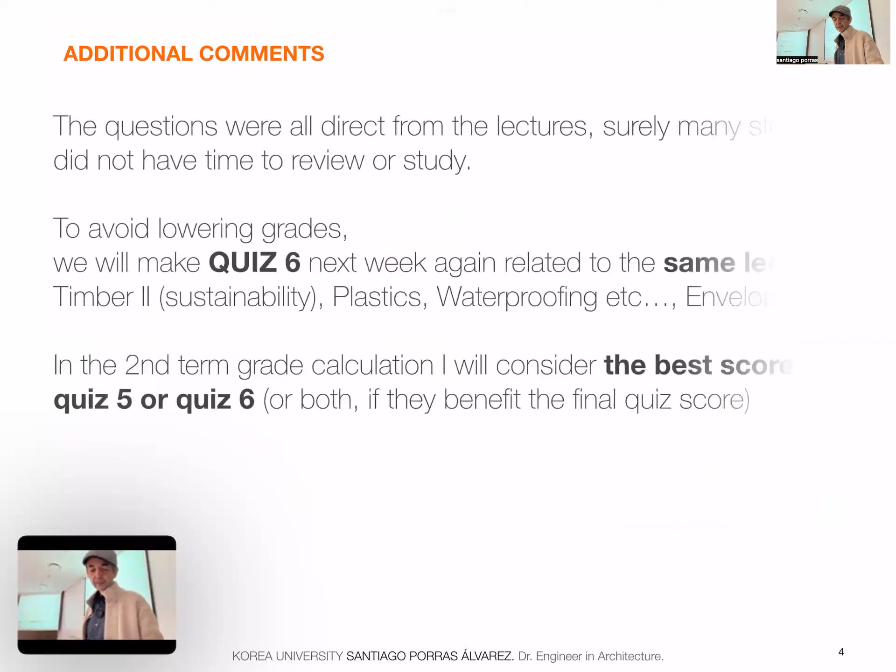So next week, next Tuesday, we'll have quiz 6, which will be the same contents, right? Sustainability in timber, plastics, waterproofing, fireproofing, and so on, and the introduction to envelope.

And my idea is to take the best score of quiz 5 or 6. So you have an opportunity to get better.

Unless that may complicate, maybe both the scores, because if you do very well on both, they might benefit your final score. So just to benefit those who studied a bit more, right?

So please find some time. The semester is almost over. It's not almost over. We have still 6 weeks, including this. So there's a considerable part of the semester. And in general, the group is doing very well. So do not get tired too soon.

Activities, as I said, the online lectures were not so successful, so there's not many comments. Of course, they didn't have activities, but still, there is something interesting.

We had in the introduction to the envelope some comment about thermal mass, and I commented that Hanok has this kind of unique feature of having tectonics, but also having thermal mass. And quite a few people said thermal mass is not necessary in Hanok.

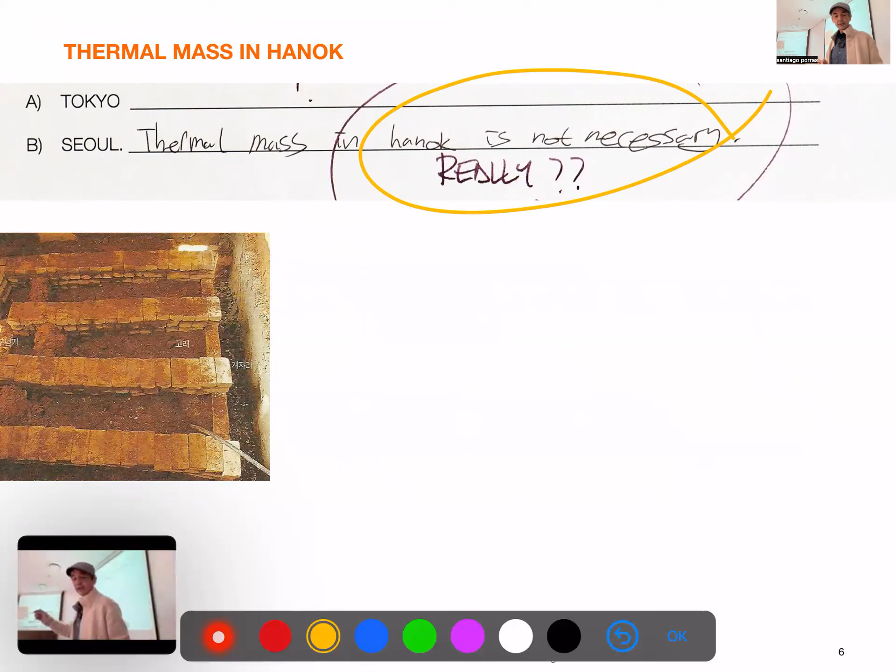This is the Ondol base, which is a series of ducts, right? Going to the chimney at some point, over which the floor is built. And those brick or stone walls accumulate a huge amount of heat, right?

And that's thermal mass, right? That's part of the Ondol part.

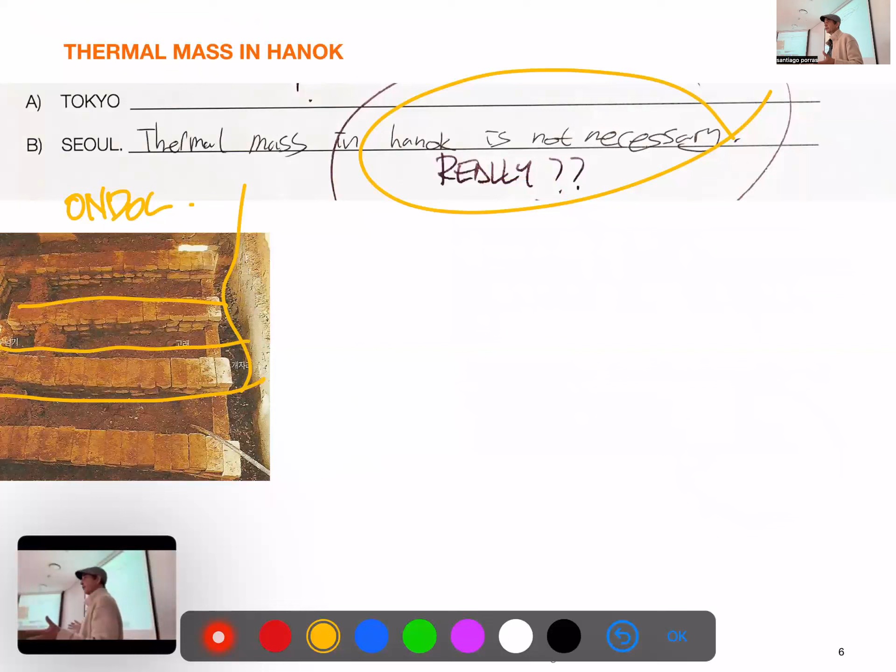So the Ondol, traditional Ondol is a heat accumulation system. Then the roof in Hanok, in temples, traditional Korean roof is really heavy, right?

It has a big layer of mud, right, of clay, not only for the shape, but obviously given that mass that will benefit in this very extreme climate.

And of course, in southern facades and sometimes in others, we have this kind of light enclosure you can totally open, but there is always kind of massive walls, at least in the borders, right?

So yeah, I'm not sure about this. Of course, you can build Hanok very light, but that is not Hanok anymore.

It is Japanese construction. We commented on Park Kil-ryong, architect, last week. He has a lot of interesting articles you can access. This is very lucky. And he studied in, well, what we call now Seoul University, right?

It was like Kyungsong Daehakyo, Kyungsong, whatever. And he wrote that he was mad at Japanese architecture. It's just a paper, it has no mass. How can that be a house, right? It's like it's against the genetics of the Korean feeling of architecture.

So I think, yeah, we should be a bit more open and really see the reality of things.

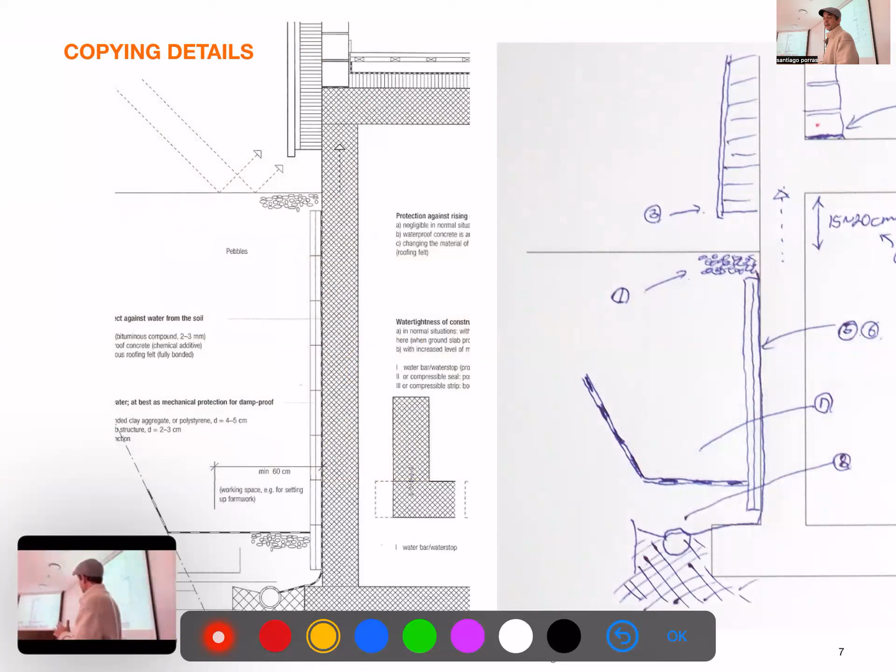Other things about this simple detail, we copied in class, and you did well. We have very short time. I gave just the outline to make things easier. So there's one part that many people did wrong, right?

If you see, we have just the concrete wall with this waterproofing, right, before the masonry, and many people put it in the wrong place, letting some kind of weird, different kind of structure. And it is surprising because you only need to look.

Remember that this course has, for some reason, the SPC for graphic expression and for visual expression. So drawing is not just doing something nice on paper, it's about looking, understanding, and applying the reality, not something which is wrong. We have a tendency to look and to draw from reality.

Even copying things, which is easier, takes some kind of concentration. You need to make a memory effort, look and check what you do. And since this is hard, we naturally rely on our memory, right? And we do what we know, and then we do not do things well. So there were more things, but I think it was so general, I was a bit surprised. So please be careful when you copy, at least copy right.

And of course, we didn't have much time, but only putting the numbers is not enough. You have to put the keywords and know what is what, right? You don't need to put a full paragraph, but you may have noticed one of the most common notes I put in your assignments is draw more, write less, right? But still you have to write something. We need to complement with at least some basic keywords and things like that.

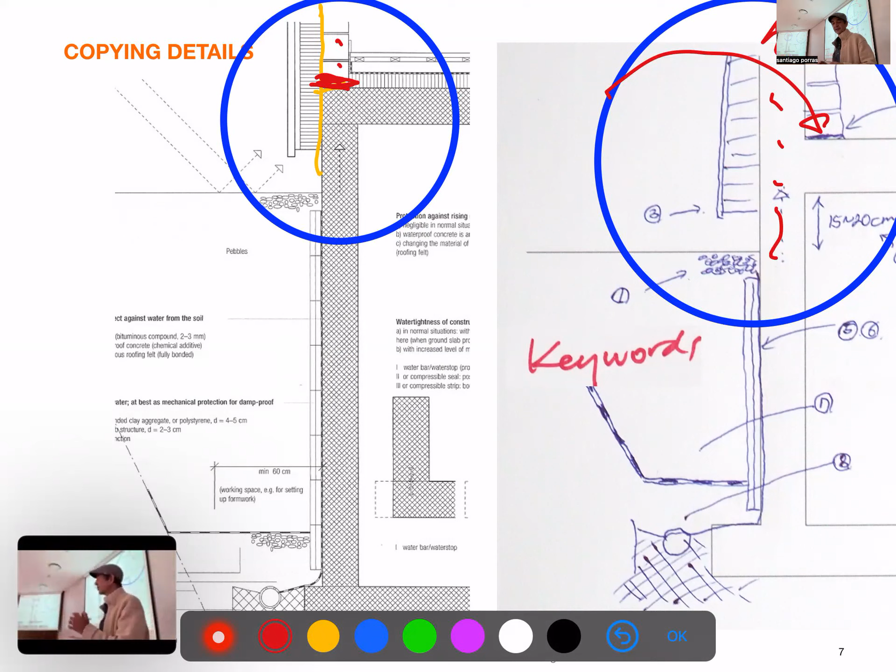So about questions and answers, we have very few. I probably will upload questions and answers from plastics from previous years, so you may want to look at it. But for instance, here's some questions. One was about this, I think you can see it, this kind of texture in the exposed concrete walls in which you have this kind of funny circular openings.

This is due to the way of construction. When you have the forms, which is usually some kind of a wooden board, there's many versions of that. In a tall wall, when you pour the concrete, there's a lot of pressure, right? So supporting that's difficult. And one way of doing it is with a steel cable with some tensors, right? To do that, you need to make a small pipe. And that's enough without needing a huge scaffolding outside. Then when it is finished, you just fill the holes with a non-retraction mortar.

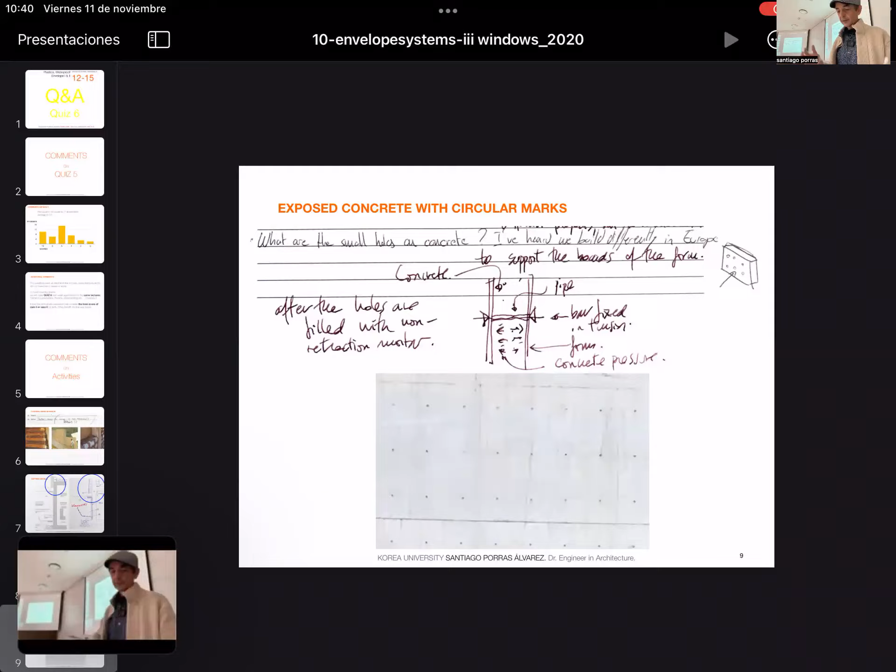So that's the why of that texture.

So there was a couple of questions about cracks in concrete. We spoke about this kind of put-in joints in buildings. There's no way, or a very difficult way, to make a totally continuous concrete without any kind of joint. And that was in the context of the Herzog & de Meuron building, right?

Then there was a question about the possibility of grooves in facades, right, in walls. And of course, I will explain a bit more of this. And of course, you can make grooves in walls, right? Only the engineers have to decide how much, how deep, how it will affect the structure. But of course, we do it all the time.

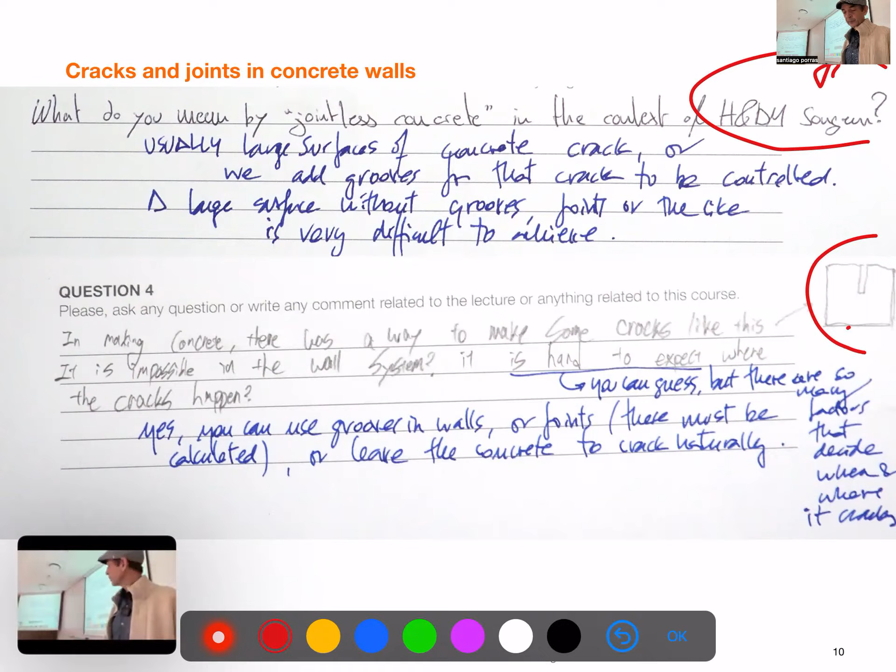Sometimes additional very small mesh of steel near the border, which is so difficult because pouring concrete is very aggressive. So if it touches the form, it will deform. So I'm not sure what they did here, right? I don't have the details. But if we go to the interiors, right?

This is an IKEA store, which is not square meters, but hectares of concrete floors. They are very nicely done, but you see they have joints, the typical joints, but you can see those small bits of steel, right, which are mixed in the mass, and that prevents the cracks quite nicely, right? I think it's the only time I saw this. I studied it in school, never did it, and that's the first time I saw it.

But even there, you see that eventually you have cracks, right? It was perfect for a few years, and I was amazed. But this building may be already 15, 20 years old, and it cracks. So that's the thing with concrete.

Well, there were questions. So how thick can a wall be? Well, as thick as you want. You are the architect, you are the boss, you design it, right? We saw that in a brick building, the Monadnock Building, we had almost 2 meter thick walls of brick, right? The problem with the thickness is that you lose space, and space is expensive, right?

And nowadays we can make light construction. The comment on thickness is that we need a huge amount of insulation to have those zero energy buildings, right? And that's something which we didn't solve perfectly yet. And of course, if it is a massive construction, the weight has a lot of influence. This is why skyscrapers need to do things as light, as thin as possible.

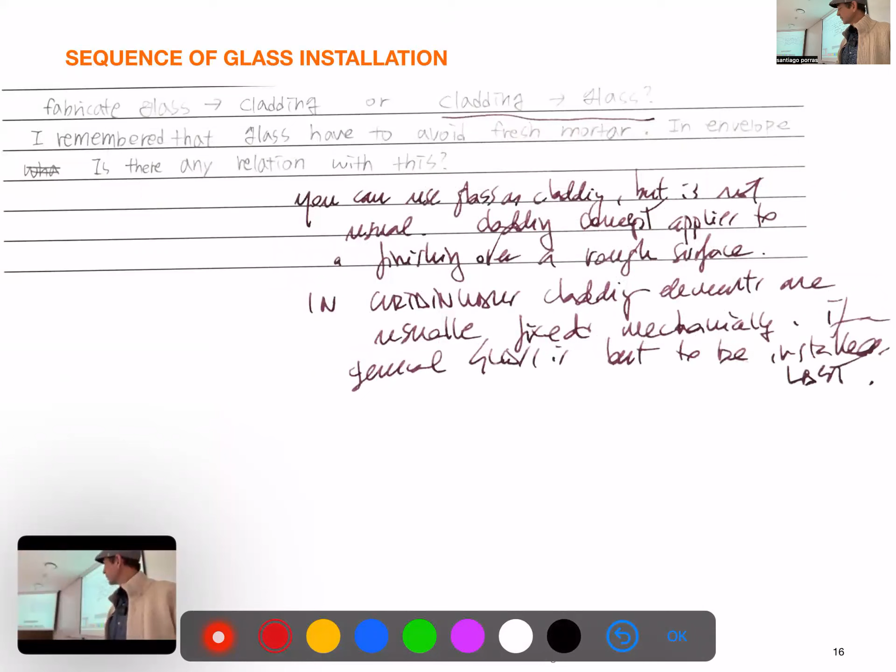And I think it's about the process of cladding, right? You have glass and cladding. If you are using mortar to fix the cladding, better to put the glass at the end because the mortar can damage the glass. If you are fixing mechanically, that's okay. You can do everything at the same time. And that said, we're going to the windows.

So I was debating doing windows and curtain walls together, but I separated them because we had these initial explanations, which took some time. And I reviewed the time we have left, which is not much, which means we have to concentrate and be careful, but it's also good because the end is getting nearer.

So nice to see you. Good morning.

So we will have windows today. On Tuesday, we'll have curtain walls. With that quiz, please study. Of course, the questions will be different, I think, right?

And then we'll have like 2 sessions just with case studies of envelope, windows, curtain walls. Here I gave some case studies at the end, which I will not explain. We'll do them in the previous session. And then we'll go into flat roofs, sloped roofs, and 1 session of detailing. And then we'll just have the time to finish the rest of the lectures.

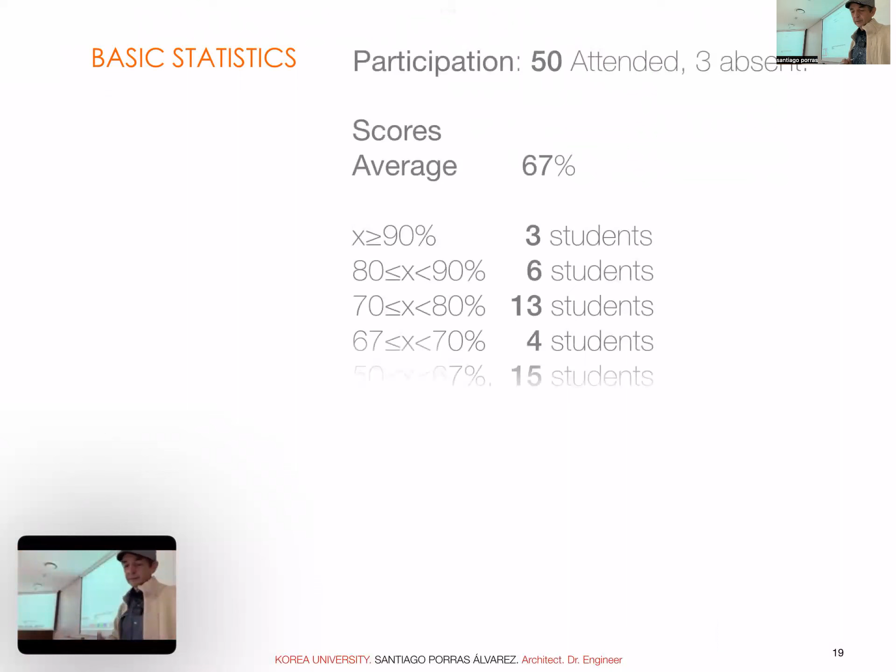Okay, we have some comments. Midterm exam, I didn't forget. Midterm exam, we had 50 people, 3 were absent. So the 3 students, I assume they already gave up. It's a pity. Because, okay, sometimes you are overwhelmed with courses and so on, but this is one annoying course. So if you can pass it, you have it done as soon as possible.

The average was 67% of the score, which is rather low, right? Still, 3 students have over 90%, right? Best 4 were 2 boys and 2 girls, so that means some balance, right? Congratulations to those who had over 90 anyhow. Majority was actually over the average, right? So that would be the average in terms of like a B plus or over, right? And we had 9 students on the fail level, which doesn't mean you fail the semester. That means that your knowledge is very poor and you should study more if you want to have at least the basics.

Because of that, as I said in the post I put in Blackboard, I raised it a little bit. So the highest was 93, so I put it at 100, right? And I did the proportion to everybody. So in that case, only 3 students were in the F. And still they have the possibility of passing the course.

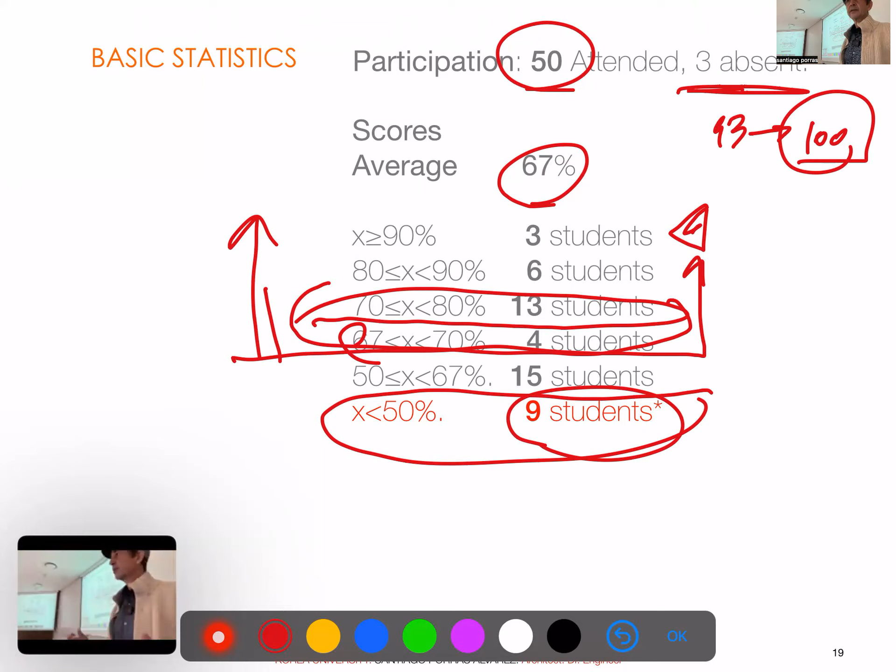So 11 questions out of 60 were failed by more than half the class. So they qualify as slightly hard and difficult. But I was surprised by the questions which were most difficult. And by far the most failed, that means only 20% got it right. That means a few people knew, and maybe a few of them got it right by chance, because you have 20% chance to guess it, right? Just this one, which is just an elaboration of the concept of cold stretching, right? Usually about half the class has it wrong, but 80%, I think, is the first time. And the question was not so difficult. We had explanations, we had questions and answers.

The second and seventh, so it's a question with 2 points, were actually planned as difficult questions, the ones in which we have this kind of log, and we had 2 questions about them: which kind of timber it is and where we'll use it. So the point is, this is the same log in 2 different positions, right? And we said it has a very dark part and is more expanded. So that is typical of a softwood, right? This is what we call reaction wood, right?

There's many ways to this. It could have been the same quality of timber. If it's the same quality of timber, it will be the difference between belly and backwood we saw in class of the trees, and then the reaction will be different. This area is reaction wood of softwoods, which is very strong in compression. Then we have the decision of what to do in this graph.

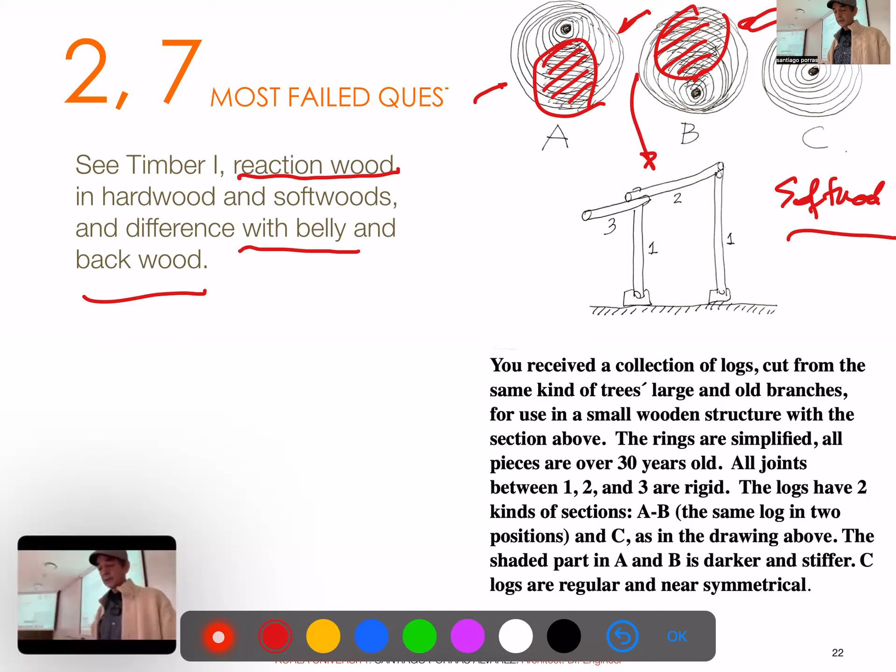So in a beam, we have the compression on the top. In a cantilever, we have the compression on the bottom. And then in columns, we'll have mostly the balanced element. This is kind of a just academic question.

I know that in general, people try to avoid reaction wood, but I have seen this used. So there's a possibility. Some students said C everywhere. That was not the intention of the exam, but actually that's a reasonable thing to do, so I gave that also correct. Those who said C everywhere is correct, but the idea was to make you think about the different positions of timber, how it affects, and the kind of wood we are using.

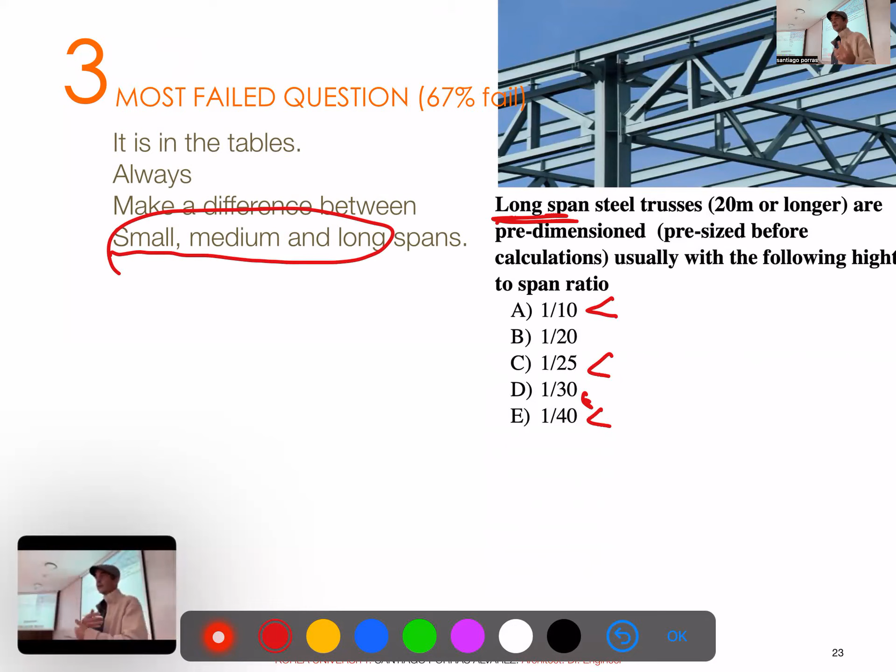I think it's the first time so many fail in this kind of question. So, yes, please remember that this is just for having a basic proportion in design work. You have to calculate, of course, and things can change a lot. But it is embarrassing — you make still projects with a section of floors which are like 5 centimeters thick, right? Which cannot hold at all.

So please go back to the lecture. It was explained, it was repeated with examples. This is again one interestingly failed by many people. This was one of the easy questions. And of course, glass we can recycle perfectly. It's very simple material, it's very easy to recycle it. You can mix with other materials and do new glass. There's not any limitation in glass recycling.

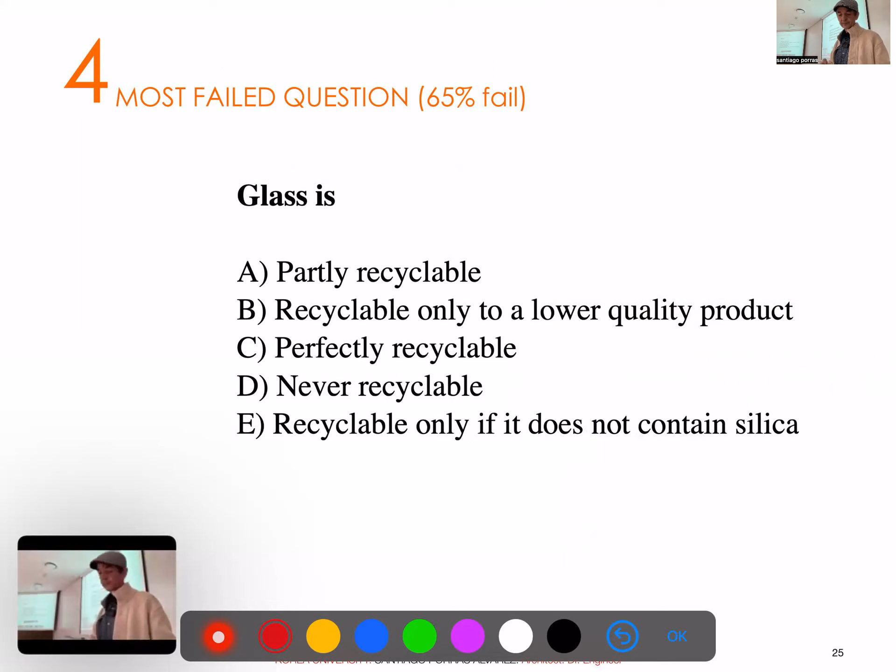In the same point was timber. By the way, I realized I didn't share the photos of the workshop and nobody asked for it. That would have helped, right? The fail here was about not the cuts.

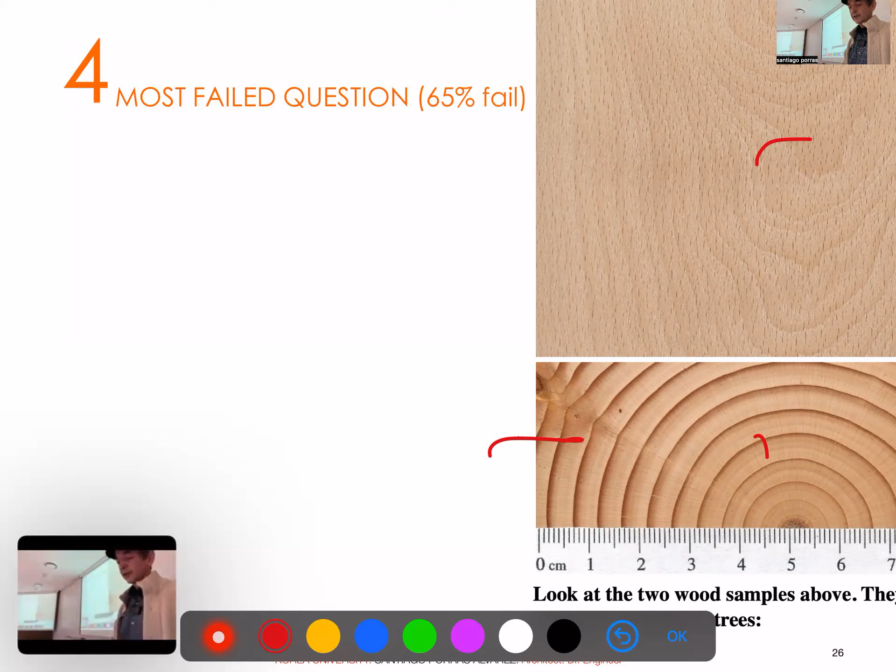Most people understood tangential and transversal or horizontal, this was very clear, so that was not difficult. It was the hardwood and the softwood. We gave the hints, and actually the top is clearly the same imitation you have in the desk, and it's a complex texture which applies to hardwood. And the photo on the bottom was also in the lecture, it was one of the samples we had of the pine trees, I think, with the conifers.

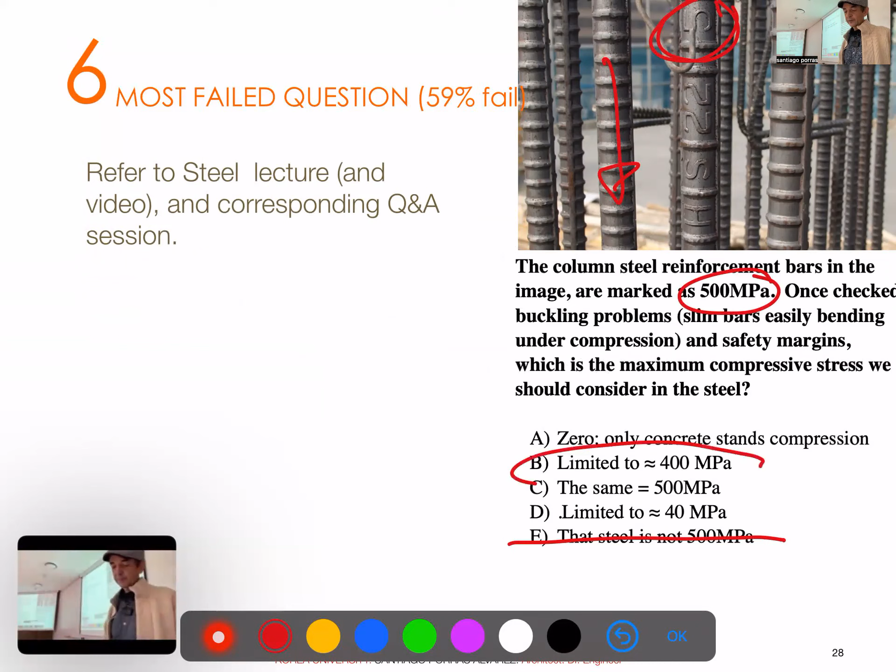This was interesting also. Again, this is something we explain often. So the steel in compression reverse. We did in class, we commented in the activities, we had something, so I will not repeat, it was explained. And you have here the 5, so the steel is actually 500 megapascal. But the point was the limitation to 400 in compression, and we said why.

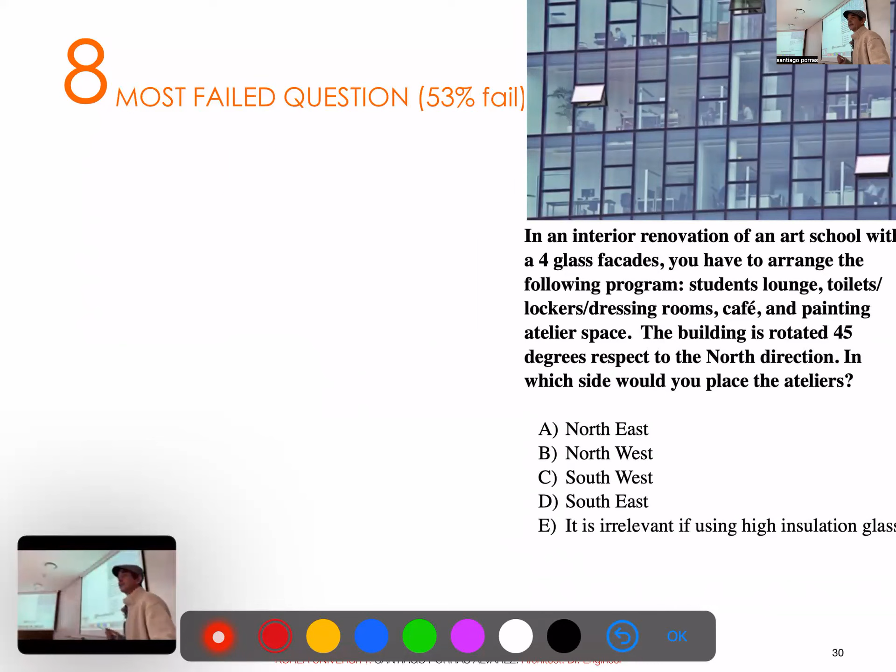And finally, the question 7 we saw before with the timber—I just gave up about north, south, east, west. Still, many people replied that the best glass wall for a workshop is southwest, which I do not wish you to have as your office in the future. About 10 to 15 of the questions were extremely easy and were done right by over 80% of the class, so the exam was okay.

If you have more questions, you can always ask. We don't have much time left, so we're going to move on to Windows.

Windows are an important part of the project, and many good architects have memorable windows. This is one of my favorites—Voysey, an Arts and Crafts British architect who made fantastic houses. Those bow windows on one of his most famous houses are really gorgeous. There's a tendency of making windows like the typical Annam-Dong villa 1 by 1 meter sliding window, which is okay, but windows are really one of the most interesting parts of design, creating not only the image of the building but also good interior spaces.

So this is the plan for today and Tuesday. Let's go straight to the first part, Windows. This example is a house in Karuizawa by Hisao Kohyama. Kohyama is from the school of Louis Kahn, apart from being my professor, and his windows show this obsession that Louis Kahn and everybody behind him had with making a full world out of the windows. You have shades, a totally closed window, a small part used as a beer stand, small openings for ventilation—you can even open the floor to clean and put the dirt on the ground. So there's a lot happening in just a small opening of a window.

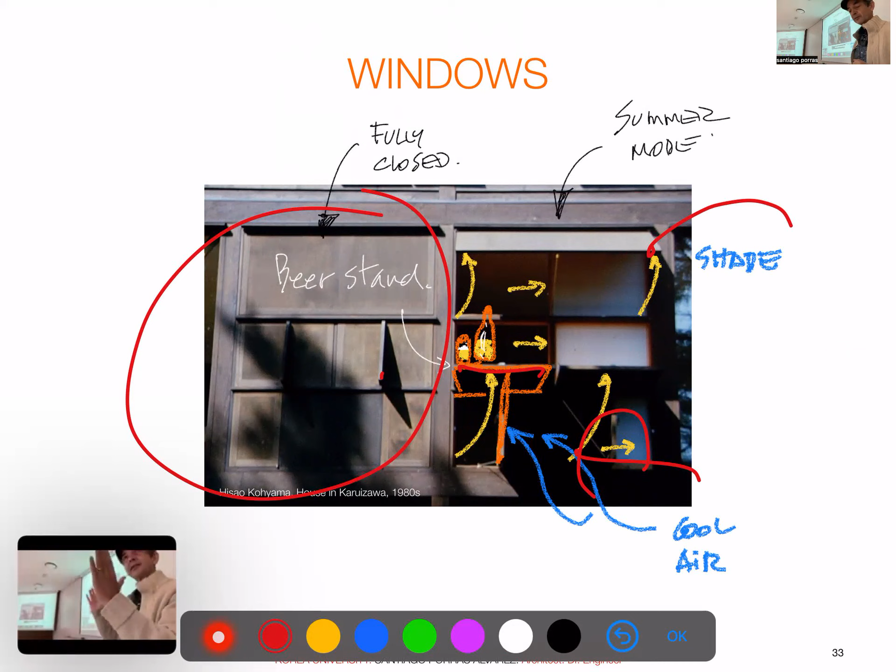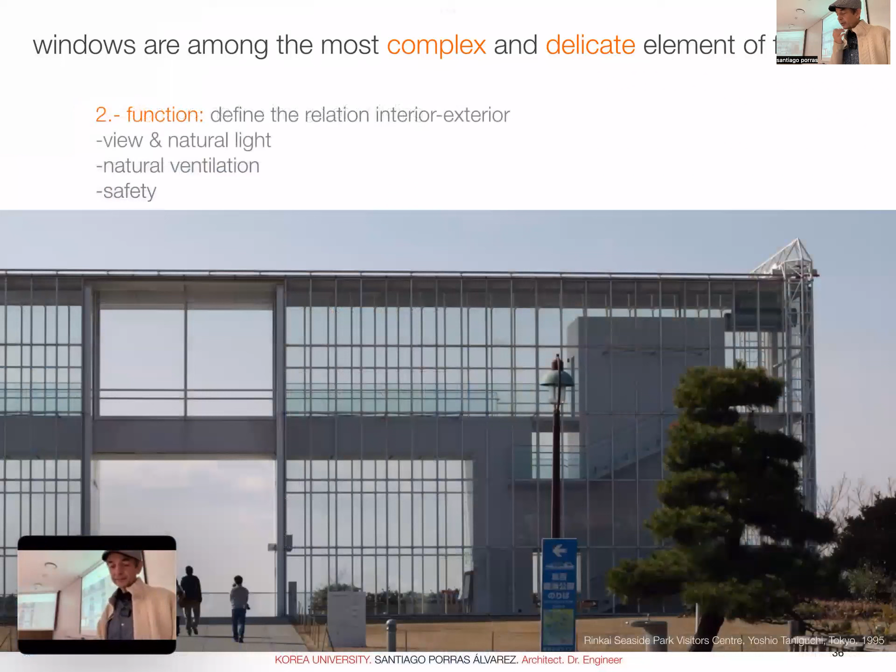Again, this is another of my favorite buildings—this is by Yoshio Taniguchi in Tokyo, a visitor center. It's a little bit out of the center, but it's really fantastic—a glass-only box, elegant and very well detailed.

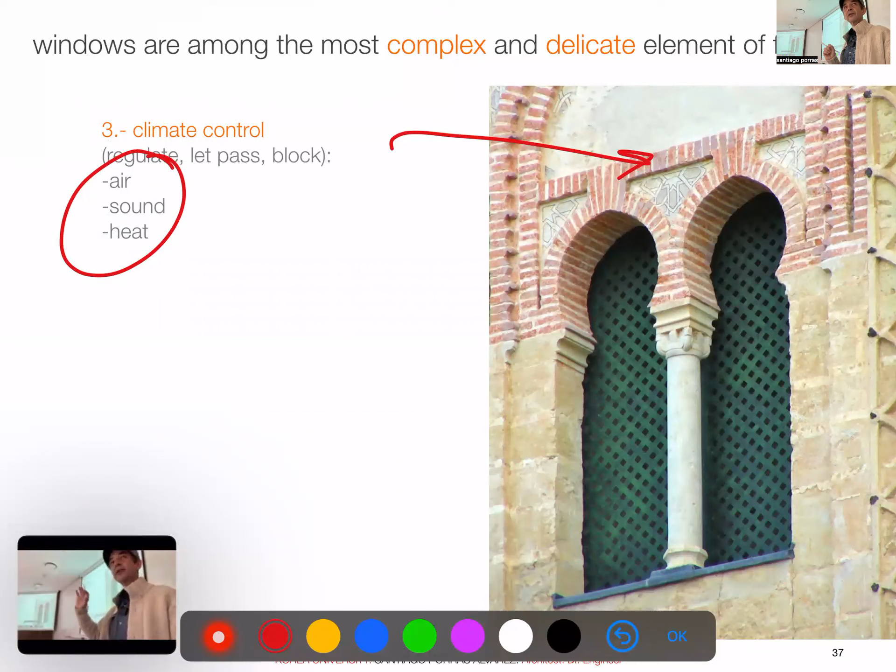Then, of course, we have climate control, especially air, sound, and heat. This is a window, I think in southwest Spain, in which the view is not important—it's just diffuse light and air going through. So sometimes glass is not the essential part.

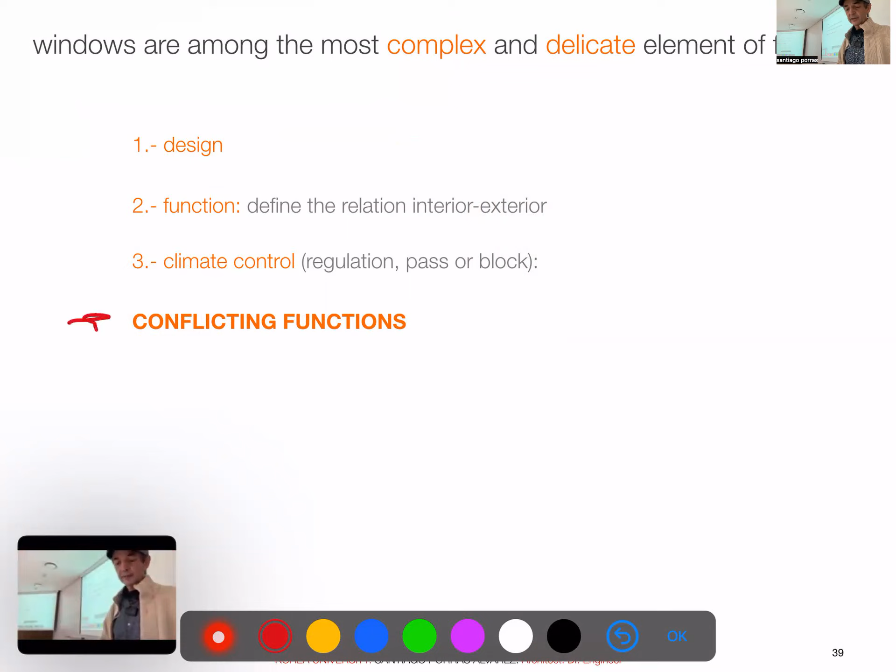But there is one thing to consider: some of those functions enter into conflict, and that's a problem when you have to comply with codes and still want to make good architecture. For example, we need clean air to breathe—that's a biological need—but letting windows bring air inside makes us lose energy. And if we let air in, noise also comes in. So that point is very difficult to solve properly. This is the summary of those three basic functions, and the difficulty of windows is that they are conflicting.

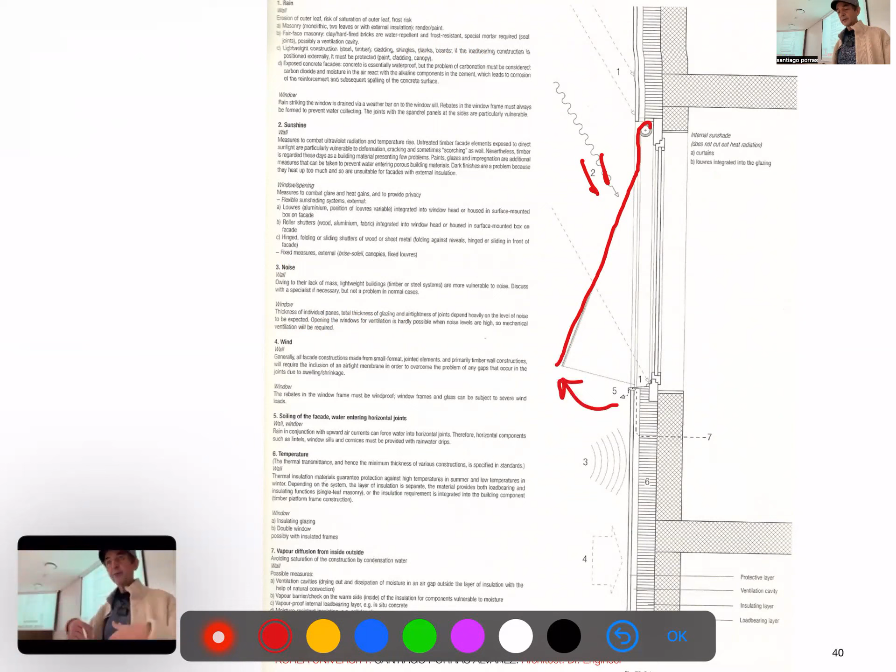So let's go back to the book—I think you have this in good quality in the final handout. It's a nice summary of everything we can do with a window. Very clever: shading outside is the only way to really block heat from the exterior, and in this case it would be rollable, so it can even be movable. Then, of course, you have the glass, and you may have an inner shade—so we get three layers, and the text elaborates on those basic functions we discussed. You'll notice we have very difficult joints where water can come in, and thermal bridges, which is what we'll try to look at a bit in the following parts.

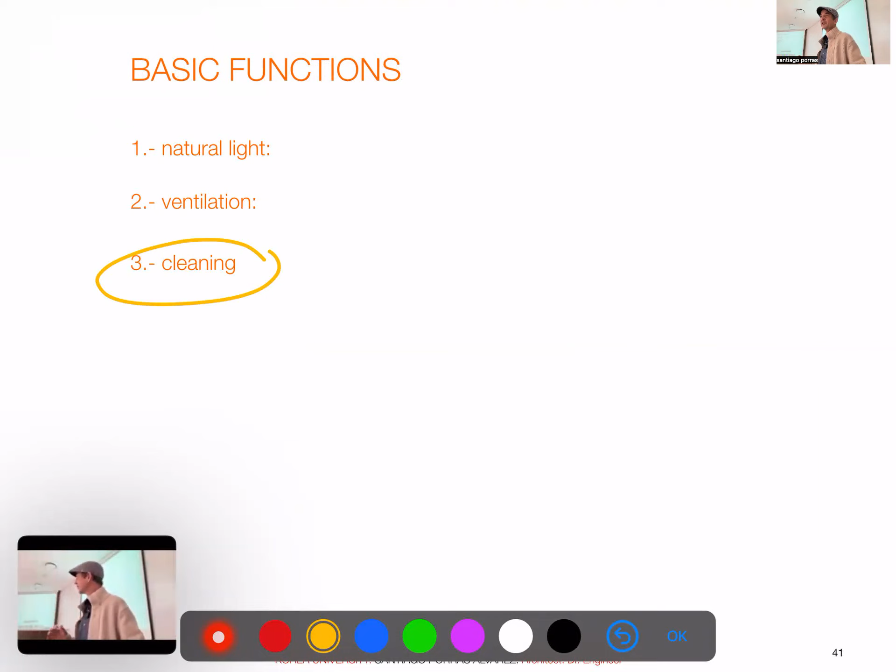So let's go about the functions. And I put cleaning because surprisingly, Korea is a country where cleaning windows is not a habit, but almost everywhere else in the world we have to have our glass clean, and that has some kind of safety issues. So I will just make a small annotation on that.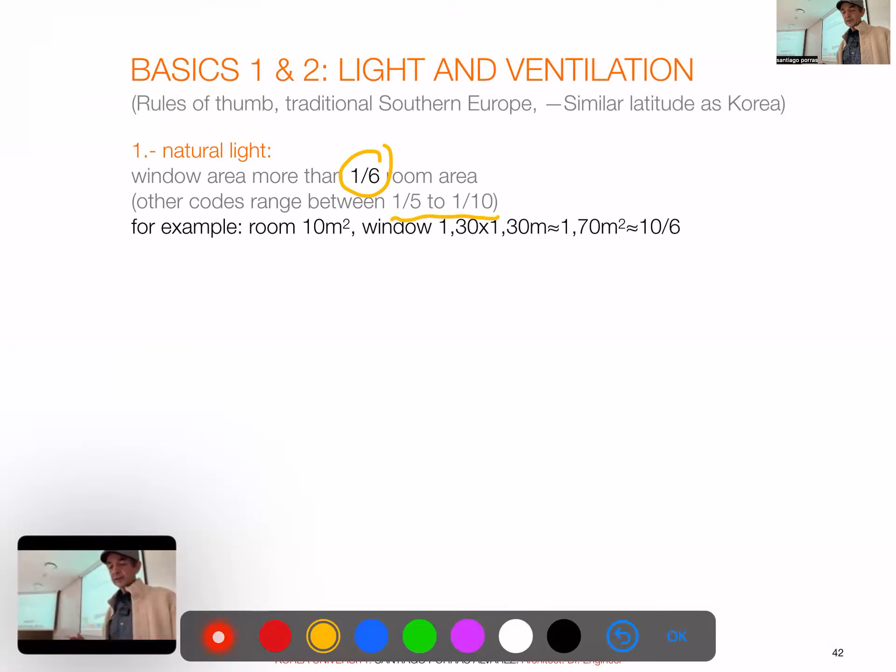For natural light, I will add some rules of thumb, things the old guys taught, or what I learned in school in the 1980s, about how we could dimension the windows. Usually we made a ratio between the area of the room and the area of the window. There's not much science, just practical experience. Usually we try to have at least 1/6 of the room area. Other codes give you more or less. So if you have a 10 square meter room, a typical bedroom for 2 people, we can have a 1.3 by 1.3 window, which surprisingly is very close to the standard window you see everywhere. 1.2, 1.3 — probably that comes from habit.

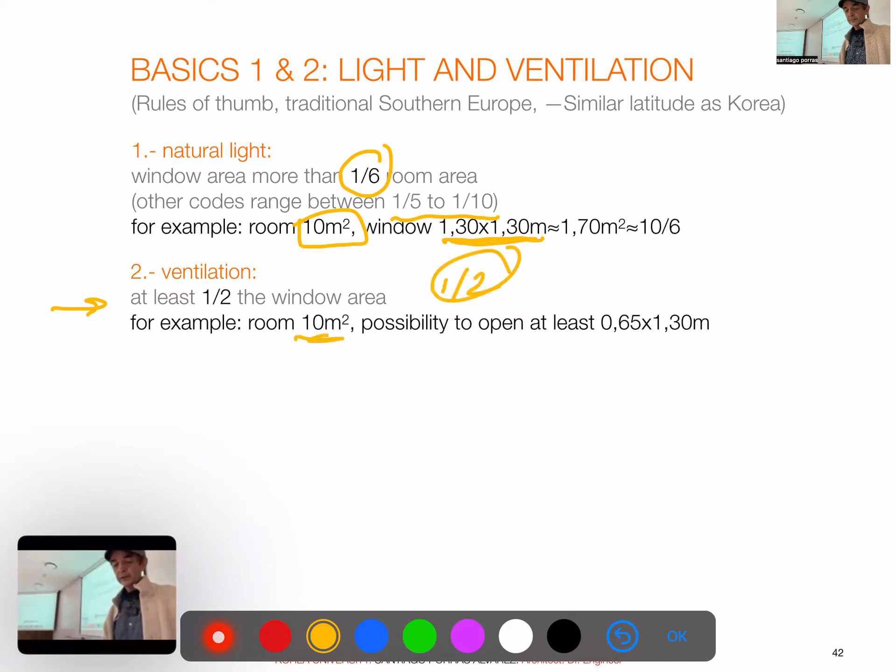For ventilation, again, this is for mild climates — it's about half the window. So in a room of 10 square meters, it would be half of that. This natural ventilation is something that these tiny openings in curtain walls do not achieve, because the ventilation area is very small, and that doesn't help cooling or renewing the air as we need. Again, this is a traditional thing.

Natural light, yeah, we usually say daylight. We don't call it sunlight in general. Sunlight is like straight sun hitting somewhere. So daylight can also be diffuse, indirect light, or reflected light.

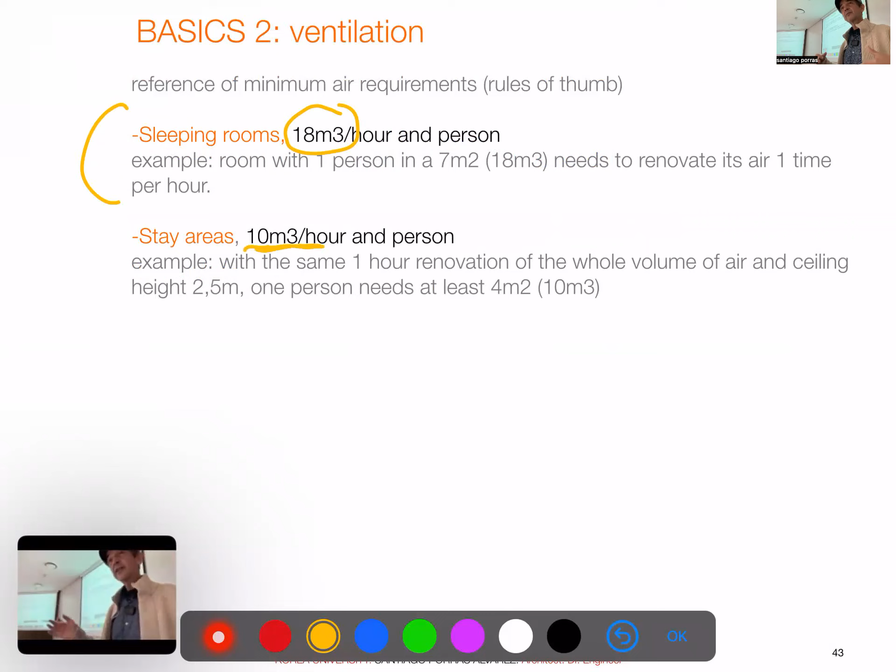In general, in terms of volume, in bedrooms we calculate 18 cubic meters per hour per person. In areas of stay, a bit less. When we sleep, we really consume a lot of oxygen. If we have a typical 2.5 meter high room, that means 7 square meters per person, and in living rooms, like 4 square meters per person — which again, if you see the standards for minimum space of rooms, they are defined like this. A single bedroom, 7 square meters, is quite standard. Double bedroom, 10 square meters. Living rooms for 4 people, 16 square meters.

Many of the basics we have as habits, developed in the 1950s, 60s, 70s, come from these calculations.

But the problem is how to put the air inside. Of course, opening the windows is the easiest, but we lose a lot of energy. So the most basic method is by infiltration — sashes are not perfect, you have slits, and the pressure of air just pushes inside. In a typical building, the air may go through the slits of the doors. And this kind of air movement — if you have both facades, there's pressure and depression, and that helps the air move. If you have a stack effect, that helps even more. This is a very typical design choice.

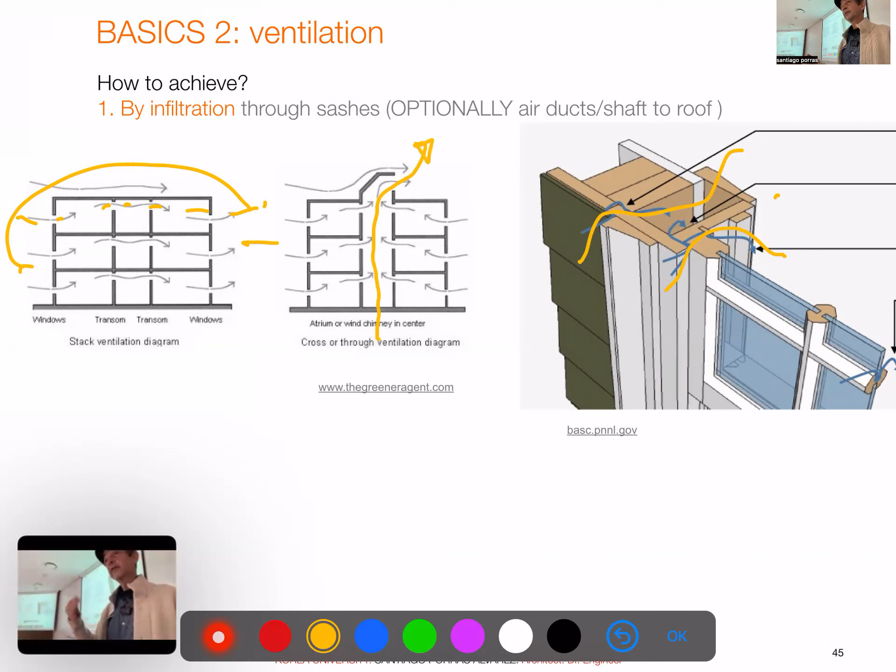But the problem is if infiltration is not controlled, and if you run the simulation, both heating and cooling are a disaster. So the tendency, if you want to go simple, is to use aeration devices. In the sash or frame, you have small slits which let air in. Sometimes they're automatic — when the air is too dirty, it just opens and lets air in. This comes mainly from Scandinavia — Swedish, Danish, and Finnish did this as a kind of habit. Now with strict codes, we're importing them even to Spain. So that could solve the problem.

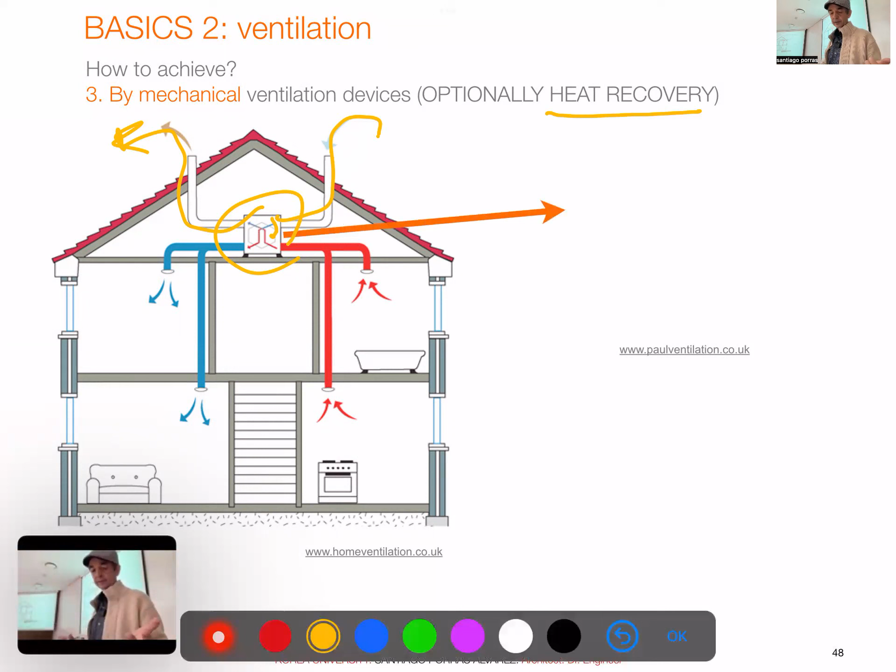But the best system is a mechanical system — you put clean air in from the outside. Very importantly, you have a heat exchanger, a heat recovery element. So when the air comes in, you collect the heat already, and then you throw away the dirty air without losing much energy. That's the basic concept. The heat exchanger is very simple: there's a device with metallic sheets, very thin elements, which give a lot of surface contact with the air coming in and going out. They have surprisingly good performance — over 90% of the heat is recovered.

What is the problem here? We need a machine, we depend on electricity. We switch it off when the weather is nice, and the pumps and fans are noisy. It's not always great. So this is the summary.

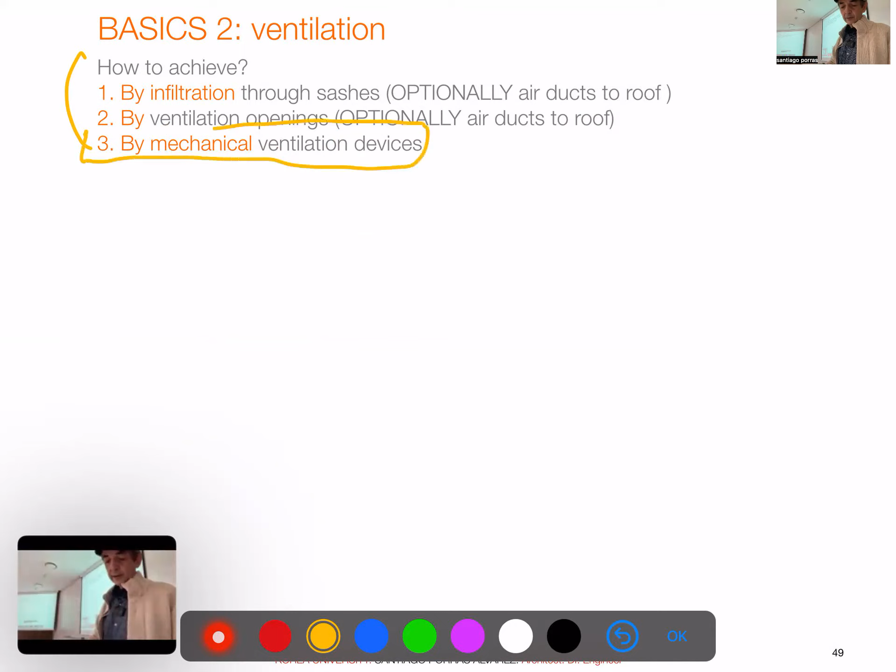Nowadays with the codes, every housing is mechanical. Some architects say there's a good opportunity to have windows fixed, which are cheaper and easier to make. But I think as humans, we like to open windows to have clean air inside. So I would suggest combining those things whenever possible.

We are very short on time, but I invite you to think for 3 minutes about those three systems, their advantages and their inconveniences. So you can say 4 to good and 1 to bad, and see in a table those 3 basic systems in one go, so you have a mental image to decide what to use and where.

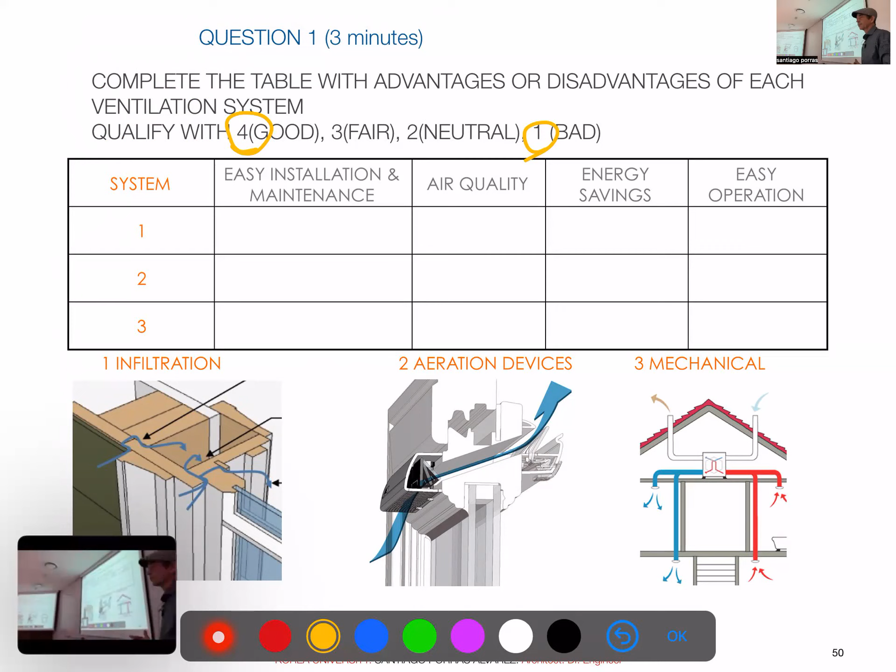You can talk, you can discuss, you can fight. This is such a fascinating thing about opinions.

Okay, one more minute. Somebody already finished. Well, so you have your conclusion. You're undecided, huh? Just guess yourself what is better or worse.

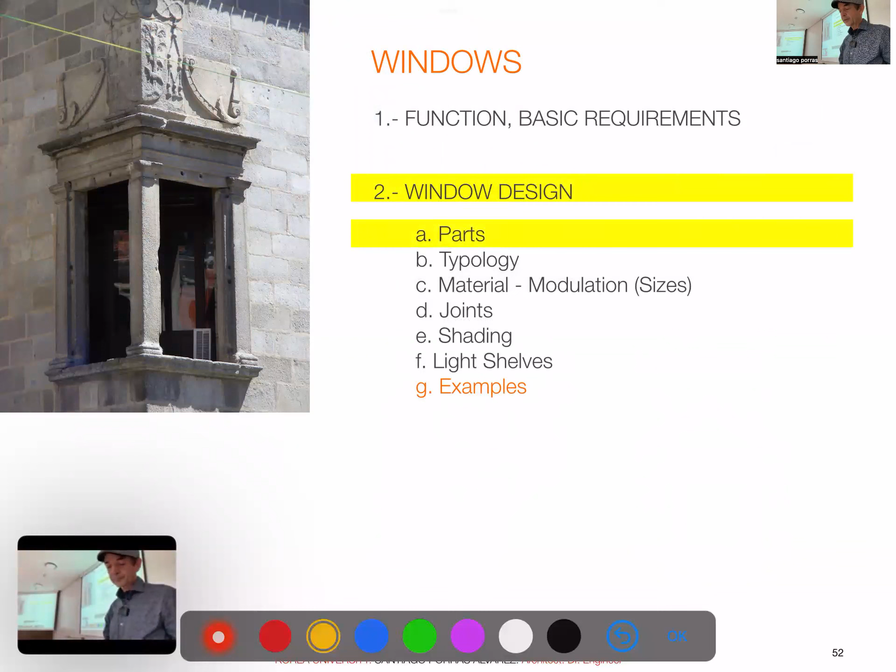So this is the basic functionality of windows. Now we go into the design, and first, this is mainly vocabulary so I will not expand much. This is an image from the Deplazes book. The top is usually called a lintel, actually a structural element. The side, the book says reveal, which is correct. I see often also jamb, spelled J-A-M-B.

Very important, the sill. The sill is the most critical part of the window because the rain and water just accumulate here, it's the weakest point by far. And then the spandrel, also used in Korea - that's the space you have in section with windows and floors. By definition, it's the space between window and window in vertical. That's the definition of spandrel, so anything between windows is spandrel, whatever.

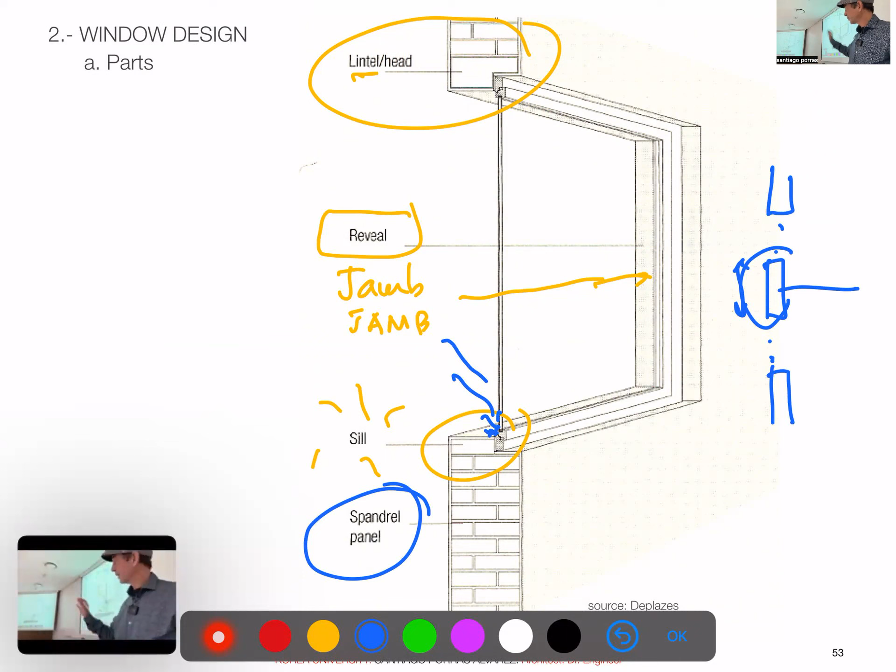About the parts, this is Lafayette Apartments by Mies van der Rohe. They are still in use, you can rent them, but you cannot change anything, it's very protected. So this is the original window by Mies, and that helps us see many parts. The glass or whatever we put is the sheet, can be glass, polycarbonate, can be paper. The fixed elements connect to the fabric via the window frame. The sash is the part of the window which can move. Finally, the hardware are the elements - the hinges, the handles, the locks. Of course you have joints between sash and frame, and between frame and building.

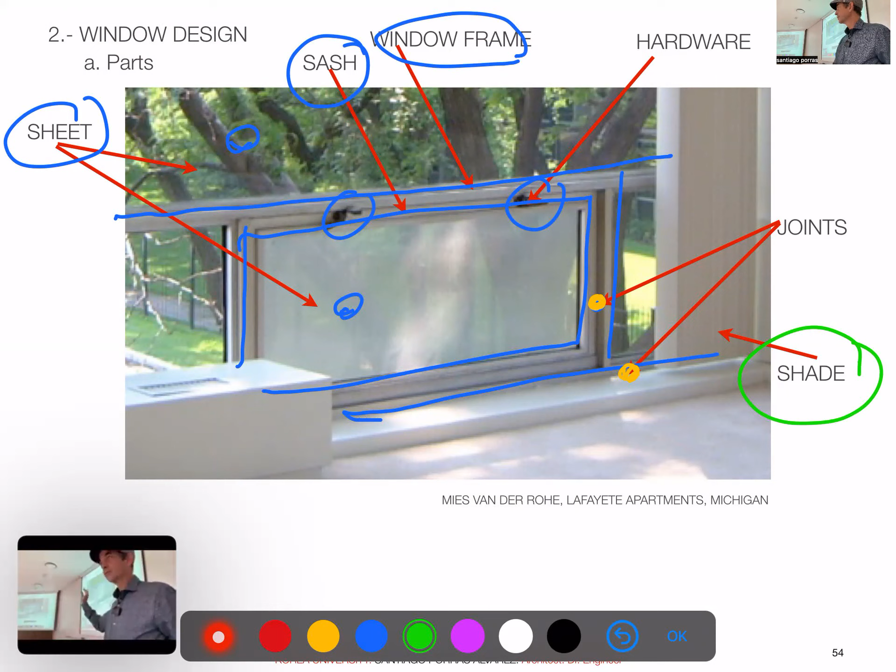And optionally a shade, which even in Michigan, the shade inside in summer doesn't work. July in Detroit - Detroit is terrible, suffocating.

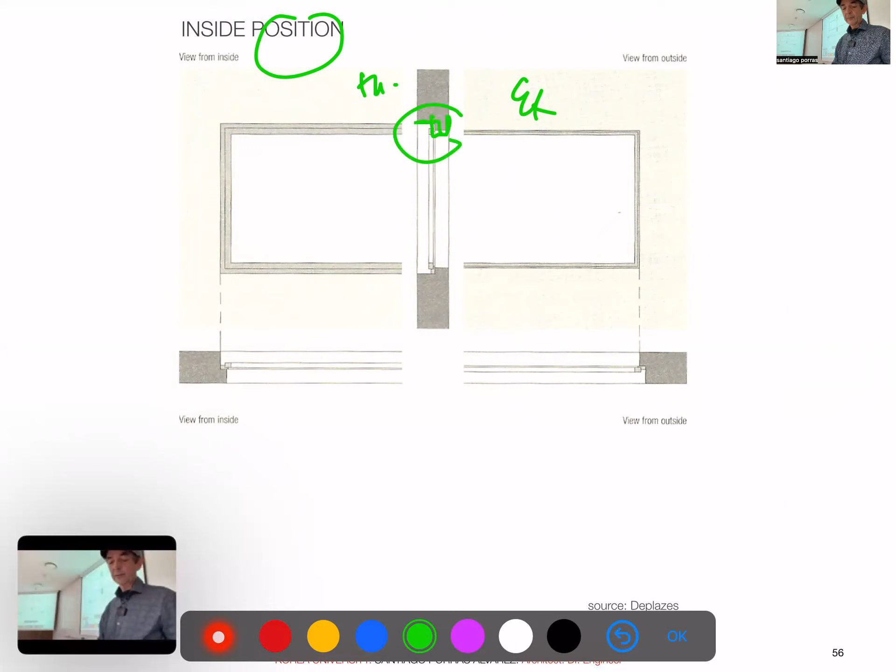Going to typology, again typology is mostly language, I don't think we need to repeat a lot. The book is the position - actually this is like an inside position, so this would be the exterior, this is the interior. Usually you have the fabric protecting as much as possible the window, but for me this is in the middle, not inside. Okay, the more inside you go into the wall, the more protected the window is. And on the exterior - exterior is a very popular choice because it is very soft, a very continuous plan, but you have very weak points. In this case, the top point is the weakest part in terms of water leaks and also thermal performance.

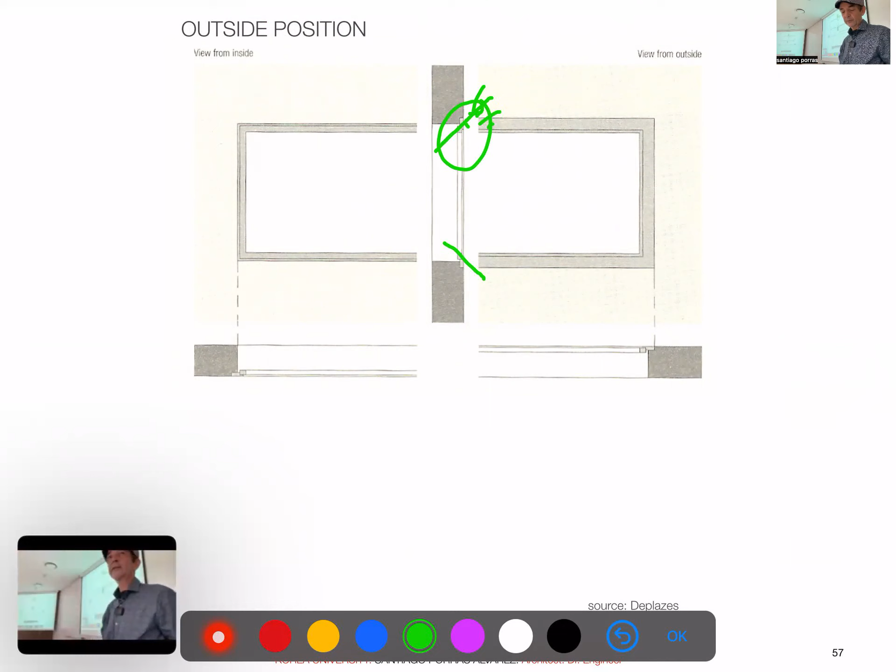So fixed is great in terms of air leak, it's cheaper. The hung system works surprisingly well, but it is not very used nowadays because they're quite complex to make. Sliding is very common, but it is by far the worst in terms of air leaks and sound - no matter how good it is, sliding windows always have a limitation there. And the tilt slide works better, but is a bit more expensive to make.

Casement are the ones just with a hinge, right? That is the most common window we know.

Just one notation on the symbology: in the United States and in Korea, the dots point to the hinge. In Europe, we do the opposite. So if you see a window in Europe with this notation, it means the window opens on this axis. So be careful when you know about the origin of the maps, because that can be confusing.

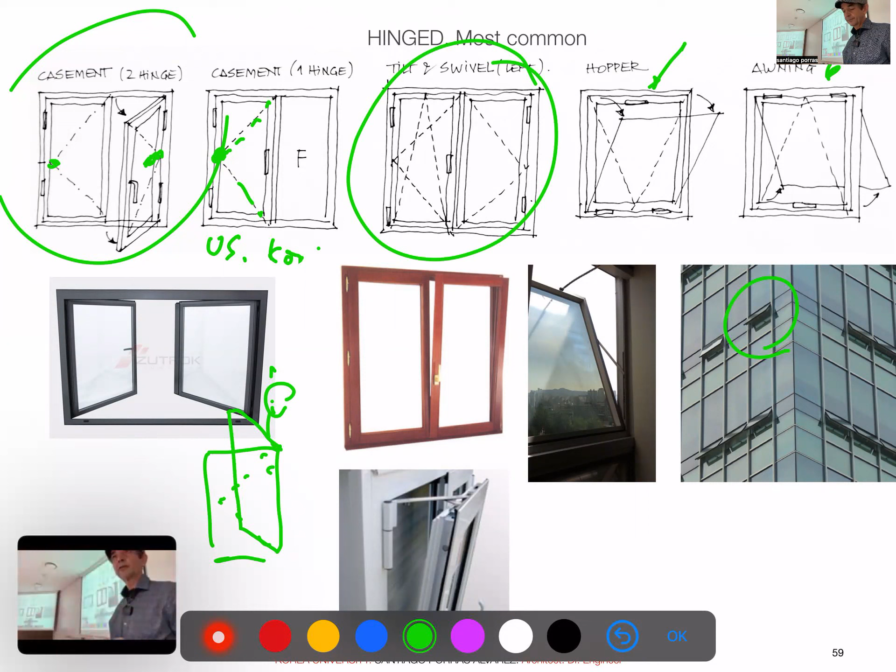And we have a jalousie, which is a series of windows which can open totally, taking less space. They are terrible in terms of leaks and noise, so you use them very seldom.

Central hinge windows are interesting because you can rotate them totally, which allows for cleaning. And they close very well, but they're very complicated. They are usually very expensive, so when you see them, you can think they are really spending a lot of money.

Accordion door is quite popular, but again, it's not a great choice. They are weak, they have many joints, and there are some makers who have very nice ones, but usually it's not a great choice if you need a good quality enclosure.

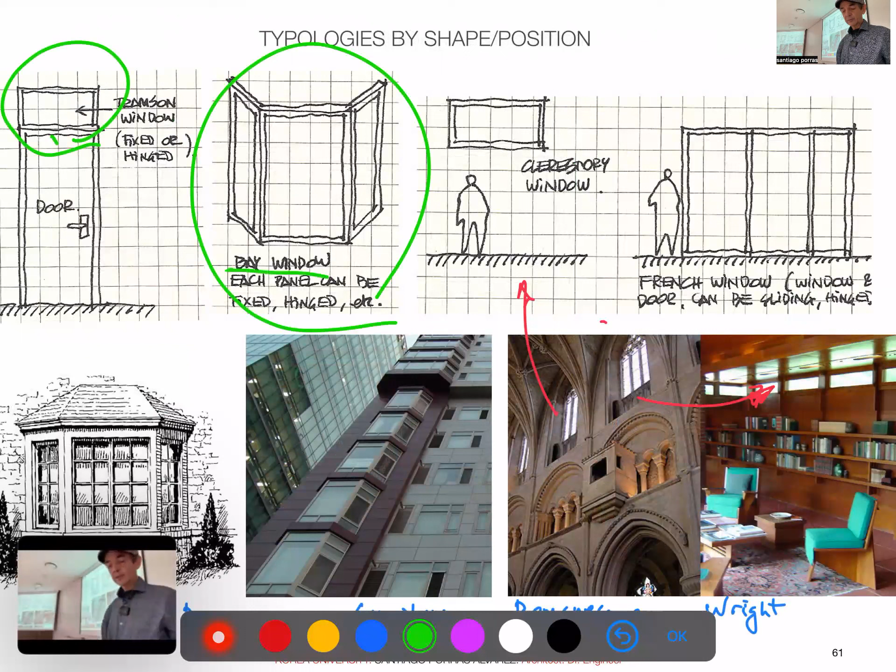And then by position, one window over one door is a transom window. If it has kind of a polygonal shape, it's called a bay window, which you can still see in Seoul in modern buildings. Clerestory window is a window which is higher.

It comes from the churches, which have many levels, so the light would come from the tall windows, and the clerestory just gave its name to those windows. Frank Lloyd Wright, for example, liked to use those windows very often, so rooms would have light from at least 3 different sides with different qualities, which is an interesting thing.

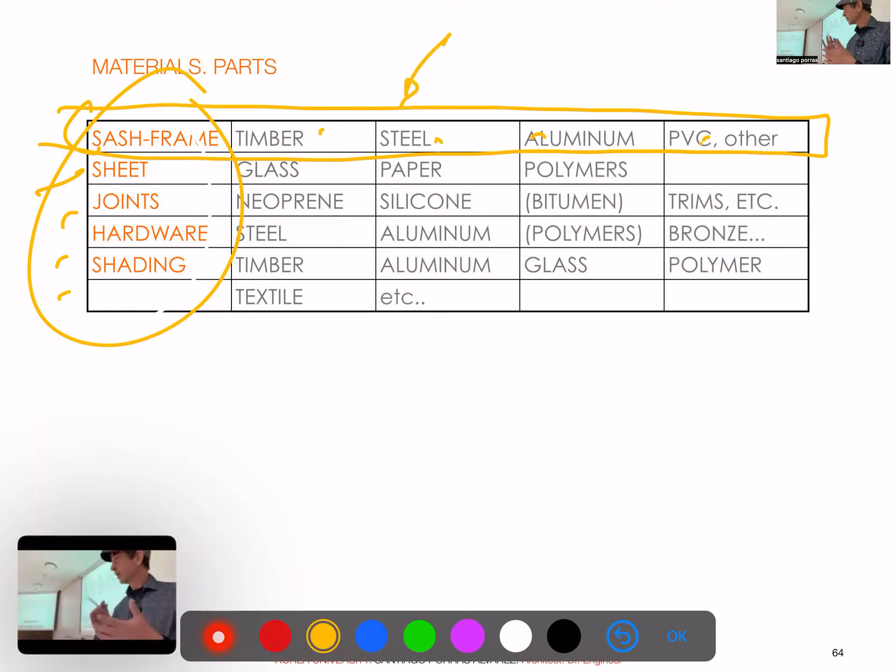Depending on the areas, the elements, we have many choices of material. Sash and frame is the basic selection, but still the sheet, the joints, hardware, shading - you have many choices. The most difficult and most critical is the sash, frame, and the sheet, because they define the image and also the performance of the window.

And then speaking only of the sash - sash and frame, right - sometimes we simplify, and they are both. We used to do an activity in class on this, but I don't have time, so I'll just give you my opinion on that.

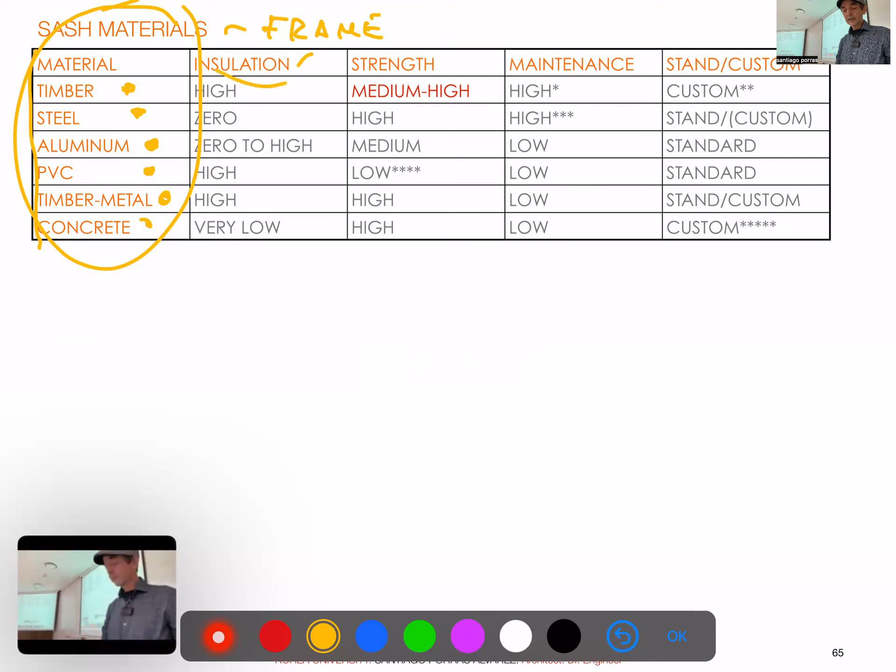We can have timber, the most traditional material. Steel is not very used nowadays. We can have aluminum, PVC, combination of timber and metal, and even concrete, for sashes. And you have the general quality: insulation, strength, maintenance, and - interesting for us - customization.

Usually with timber you can totally design, though of course you can find commercial sashes already designed. Steel you can customize. The problem with steel is the thermal performance, but there are makers working on that.

Mostly aluminum and PVC use standard materials, unless you are a Chipperfield and you make the building in Yongsan, in which you create your own louvers and so on.

There are some annotations, which I think are mostly the comments I said. I brought only one photo because this is in the Namdaemun area. I think that building still exists.

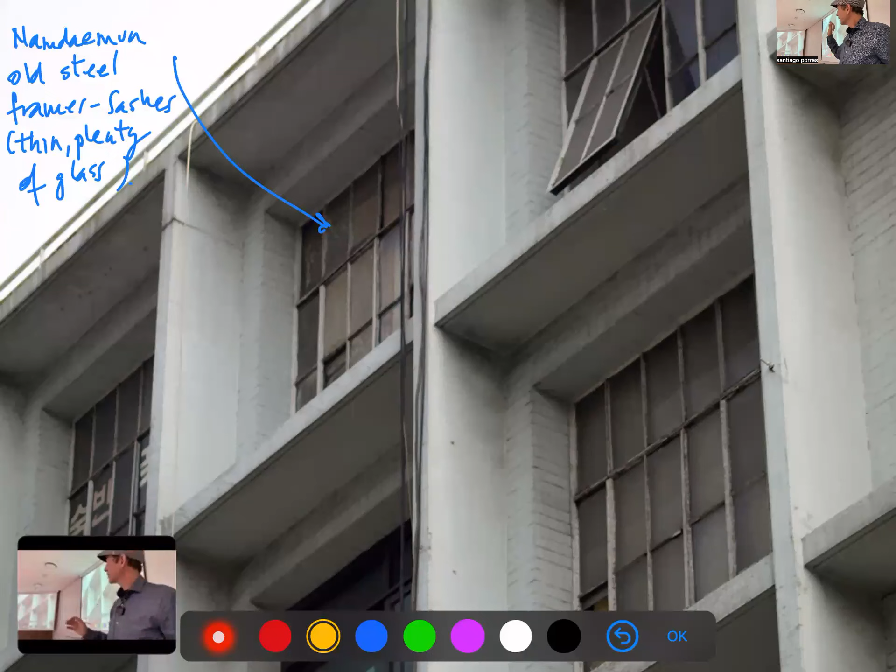Steel frames were very popular until the 70s, until energy became an issue, because you need very little space, they're very strong, and you have a lot of transparency. And those last forever, and they are very versatile, but they have the problem with insulation.

In aluminum, I brought one example. This is a Japanese maker, Sankyo, which had a very ingenious solution. You know, the problem with windows is that you design your beautiful window with whichever partition, but then you put one operable sash, and then it becomes asymmetrical, kind of messy, because the fixed part will have just the frame and the glass, and the sash will have a thicker part, right?

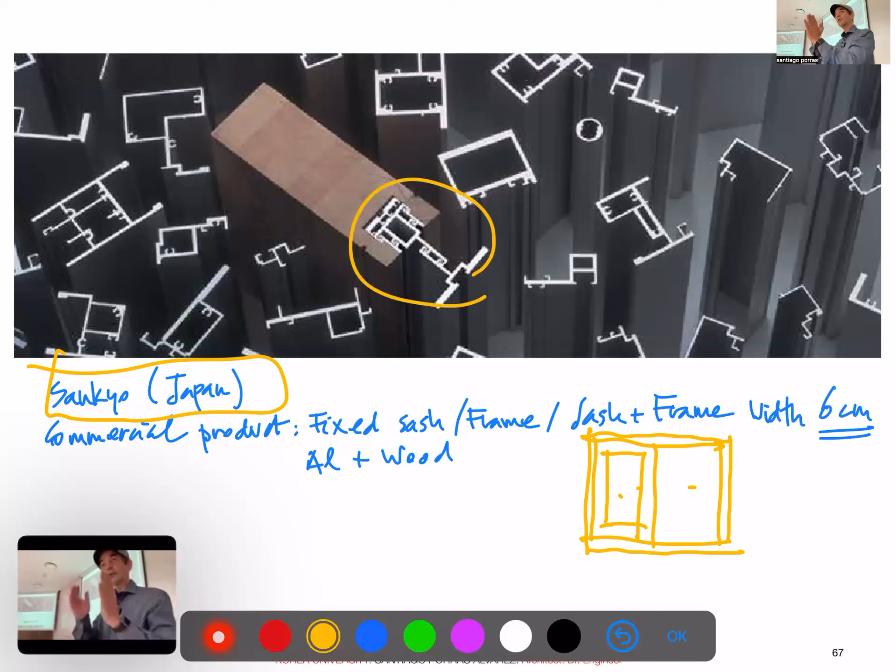And they devised a system in which all the elements have the same thickness. And to provide the mechanical strength and insulation, they have a variable element of timber. So you can have a normal window or a big curtain wall with a lot of strength with the same element. This is one of the examples. This is to show you that you can design, you can make something different.

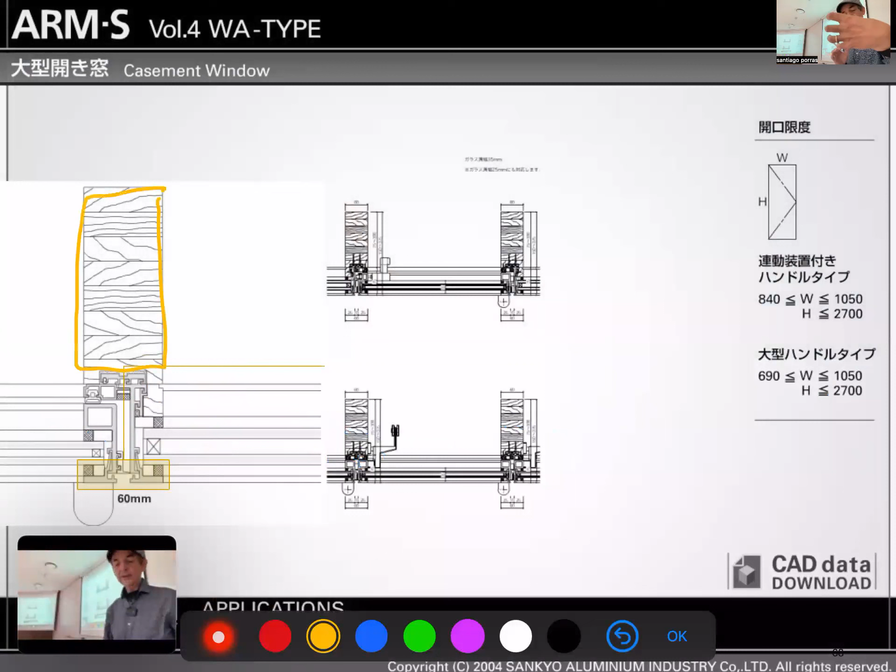So you have the timber to give not only the insulation, but also the strength. And you have one sash with a frame which fits in the 60 millimeters, which is the same you have in the fixed part. So all the facade, fixed or operable, has the same thickness.

About sizes. As we saw before, size of glass and so on, mechanical strength, right? If the window is fixed, the limit will usually be the glass. If it is operable, the casement window is actually a cantilever, right? It has to support its own weight without any other support. If it is a sliding door, you have to be able to move it, and it has the limit of the rollers and the strength of the support.

Then you have the fabrication limits. As we said, glass and hardware have limitations. And finally, the handling, transportation, and use, right? If we go to the biggest glass, 3x6, to transport it is kind of a small nightmare, right? To the truck, to discharge it, to store and to use it. So there are always limitations.

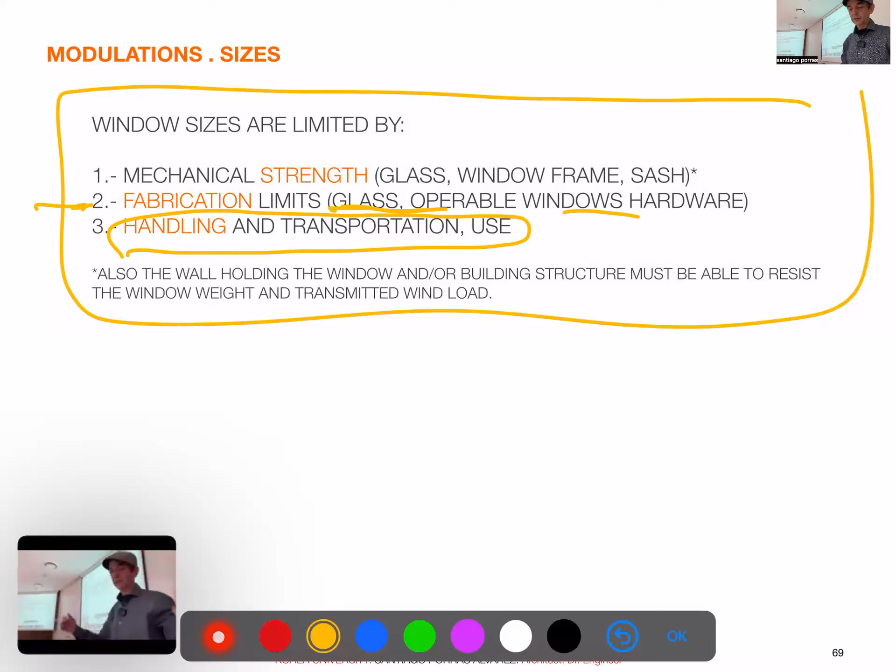Mechanical strength: usually the makers will give you some basic guidelines. They will check. If you are making high towers, high buildings, better check with engineers, because, I think in Texas, in some of the tornadoes, towers would have lost on average 20% of their glass just because of the wind pressure.

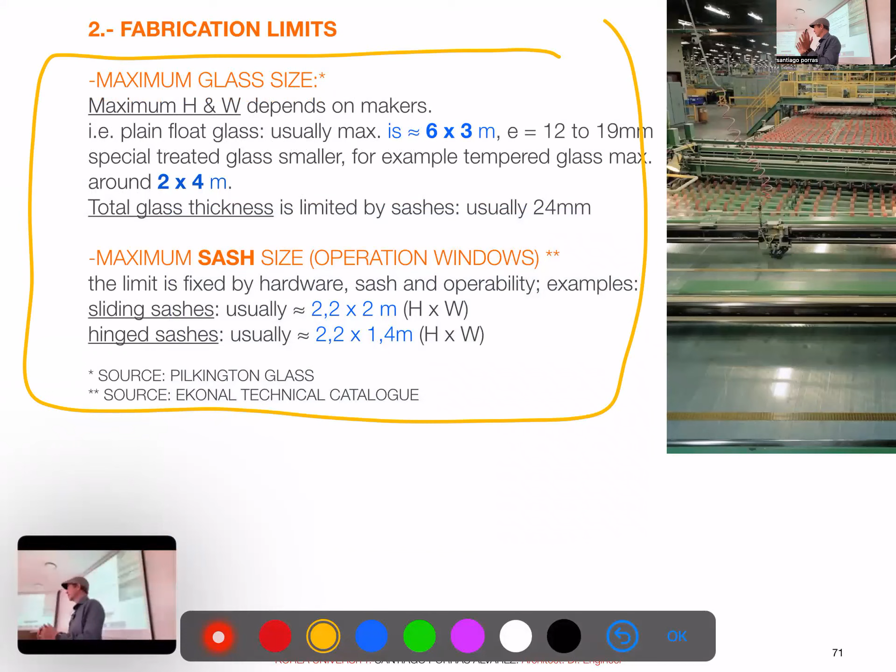Then we have the fabrication limits. Often you make projects with glasses of 10 meters in one piece. There's no maker who does it yet, right? And if you can make up to 6 meters, that's very limited use and it's very unrealistic. So just consider the usual things, right? Another thing is the sash size. This is like the general commercial sizes, right?

So most sliding windows usually have the hardware prepared for up to 2.2 meters by 2 meters, more or less, right? You can make bigger than that, but you will need a special solution with laboratory testing and checking if that works. And for hinged, it's a bit less, like 2.2 by 1.4. Again, you can have special solutions.

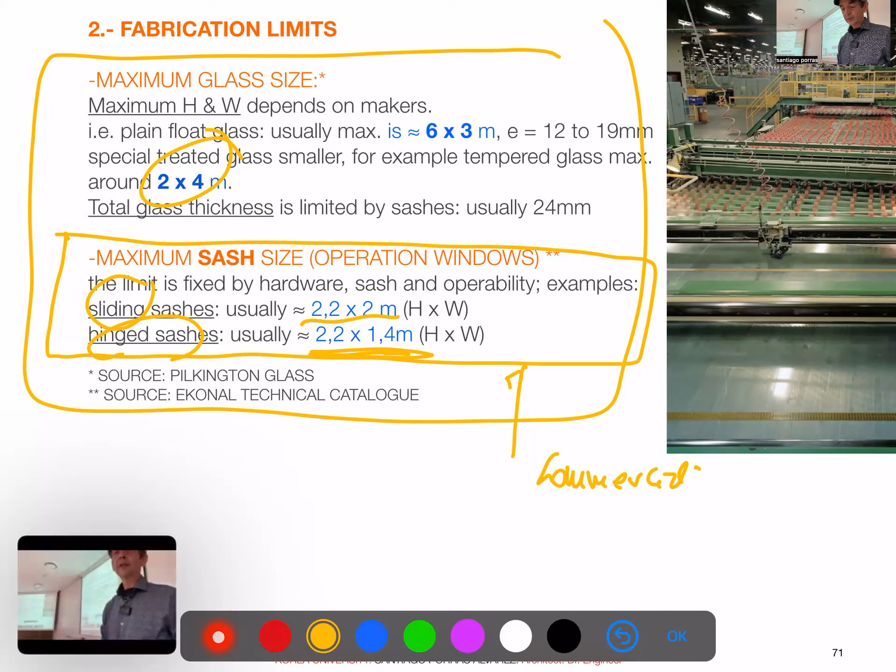You can make things bigger, but those sashes are enormously heavy, and that may be more weight than the frame itself can support, right? So if you go beyond the commercial sizes, you need an engineer to calculate, and even some testing before building.

This is one example, a tower by one of my friends. This is TMP here in Myeongdong. It was finished recently. And they tried to put the largest glass they could buy in Korea. So roughly 4 by 2 is the largest you can have as insulating glass in one tower. It's a nice building. Just as a curiosity, the cladding is black steel. It's a kind of chemical bath to make the steel black, 2 millimeters thick steel cladding.

So weight handling, this is something we insisted on. Glass is very heavy. The 3x6 glass will be almost half a ton, or over half a ton, which means real stress in transportation, handling, placement, but also the structure, the frame, and everything else. And the biggest sliding door, we said, is already 150 kilograms in general. So moving that, the rolling elements will be really stressed. You need really good quality hardware there.

And the important thing is the maintenance. Glasses sometimes break, right? Some of you noticed some broken glass in Hana Square, which has been there forever. And since it was not critical, it may stay there for a few years. We had to replace several roof glasses there already. So that's something we have to consider, because sometimes we can only replace from the outside, and then the glass replacement can become very expensive.

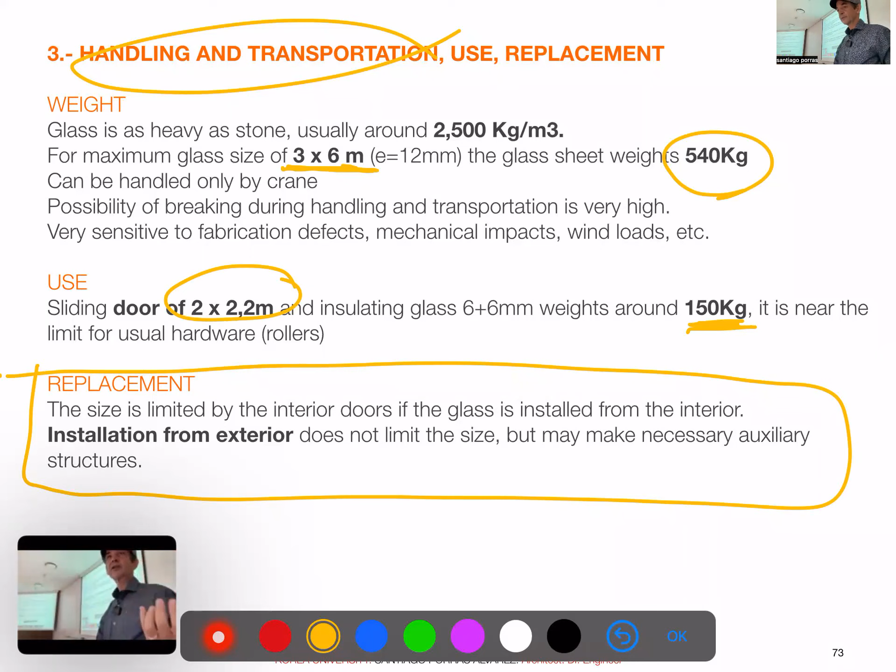Let's do the same part, which is the difficult part, the joints, right? Here, we have just 15 minutes left. Even if you don't finish, I want to see this with you slowly.

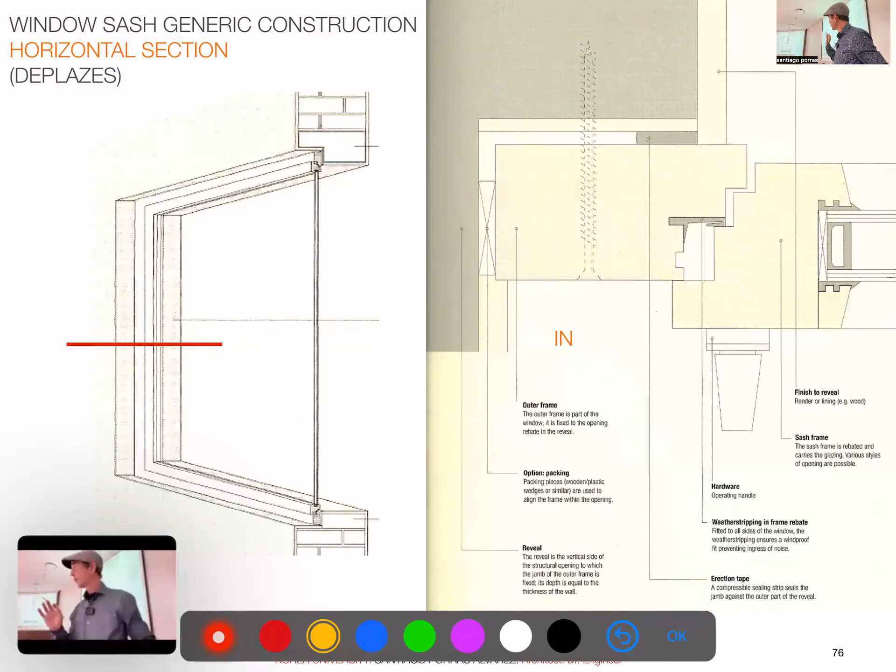This is something from the book. The book gives the example of the window mostly on the inside and gives a timber window. And this is very sophisticated. So this is probably the most complicated you can see. As we said before, we try to have the fabric, the lintel, protect as much as we can the frame of the window. So the water will slide and will not affect it much.

The horizontal section tells it. So we have the exterior part, right? Then the frame, which here is sophisticated, so we get 3 steps. Usually the frame you can simplify as a kind of L-shaped element, right? Usually we will put one kind of Z element which collects the glass, and you get the sash. So this complicated thing can be simplified as this, right? You have contacts and you open to the inside.

You notice that there is a gap between the wall and the frame. This is because construction is not exact. I insist, there are no millimeters in construction, and sometimes not even centimeters, right? It's like fingers or hands, so you need to have some gap for adjusting the window, and then you need some elements to find the exact position by the millimeter, right?

So that's one thing. The other thing is that this frame is fixed to the fabric, right? On one side or on the other, always in something which you don't see, right? So it is solid. And then the sash, again, I said it's basically one L or one Z shape. In this case, it is a bit more formed to have 2 more contacts. This multiplication of the contacts makes a better closing, right? So you have less air infiltration and less sound.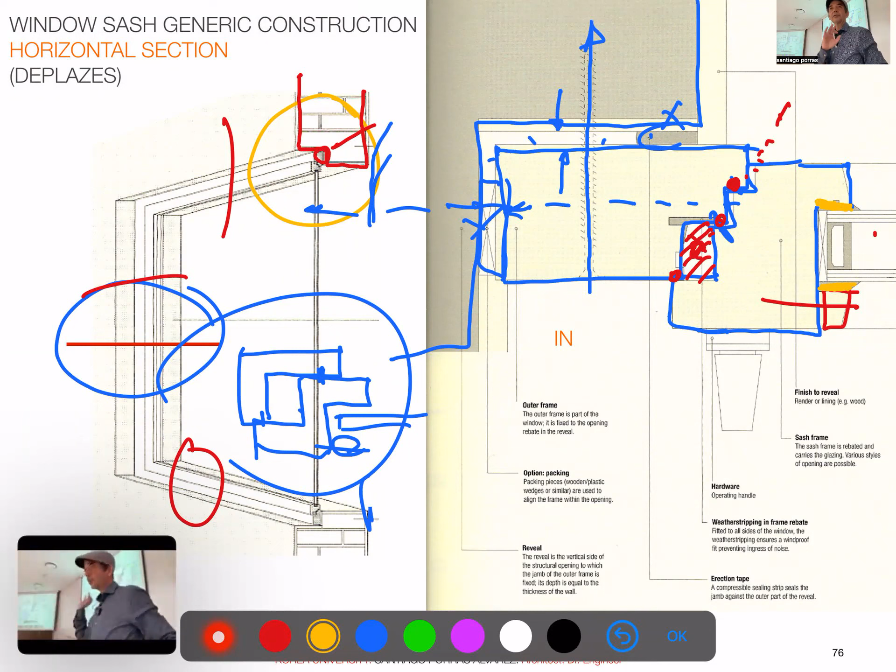Then this is a cap. Usually you will nail it to allow replacing the glass from the inside, right? So this is the most basic, and usually the frames are done in a way that they are the same section in vertical and in horizontal. Only the seal part is a bit more complicated. Another thing you have to see is that the joints are always gaskets, usually neoprene, no silicone. Of course, 90% use silicone, that's cheaper, but it's not better.

Okay. And let me go back 1 second. To hide those joints, in this case, they put one element, they don't explain what it is, but some render which hides those slits. And from the inside, you have an element also which is overlapping and is hiding that element. So overlap is a keyword I want you to remember, overlapping.

There's the overlap of the fabric with the frame. You have overlaps of the sash with the frame. We have overlap of the cladding with the slits. This is the traditional way of doing it, and this is what creates a good construction, right? Those elements give some flexibility, things can move, and still have that slit hidden.

Nowadays, you see silicone everywhere. And okay, you can use silicone, but it's not a great solution, right? You overuse plastics and polymers, you pollute the air because they have gases which flow out, you make things dirty because they collect dirt, and over time they are not nice.

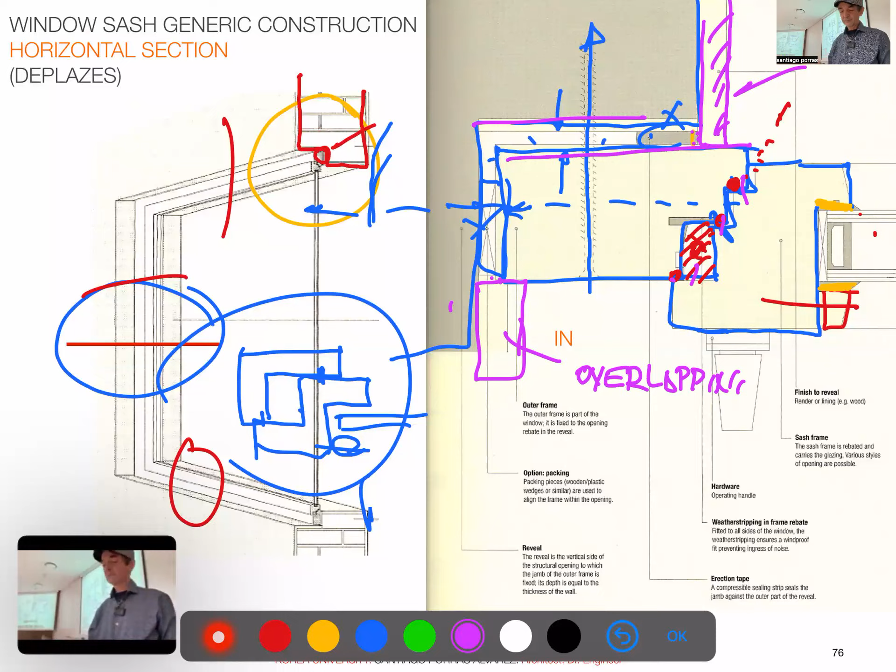So the vertical section is identical, which is clever, right? So we don't need to explain, exactly the same is happening. In this case, the cut is done cleverly, so if there's any infiltration, by gravity it will go out. See also one point in which you have an additional gasket to make sure the window closes well, right? So this window will not allow for any infiltration.

So for ventilation, you would need to have those kind of aeration devices or some kind of mechanical ventilation, or open the window sometime. And there's the window sill. This is the most difficult part. Again, this is just an example of this window, but the principles are there. I outlined the basic elements because it was not very clear on a screen.

And the sill is so complicated that in this case, they added some kind of aluminum part, right, to simplify the timber. To simplify, yeah, because in timber it would have been more complicated, right? One thing they have is the frame. The frame is slightly different. So sill is always a kind of small pane. In the book, they connect to the sill.

So if we see the window, that piece we have as a sill is this element, right? Which I don't think is a good idea to fix, because this is a weak element, it is movable. So in general, I think the bolt would go to the spandrel, to some solid part, right? This is the only thing I would disagree with in the detail. The rest is quite reasonable.

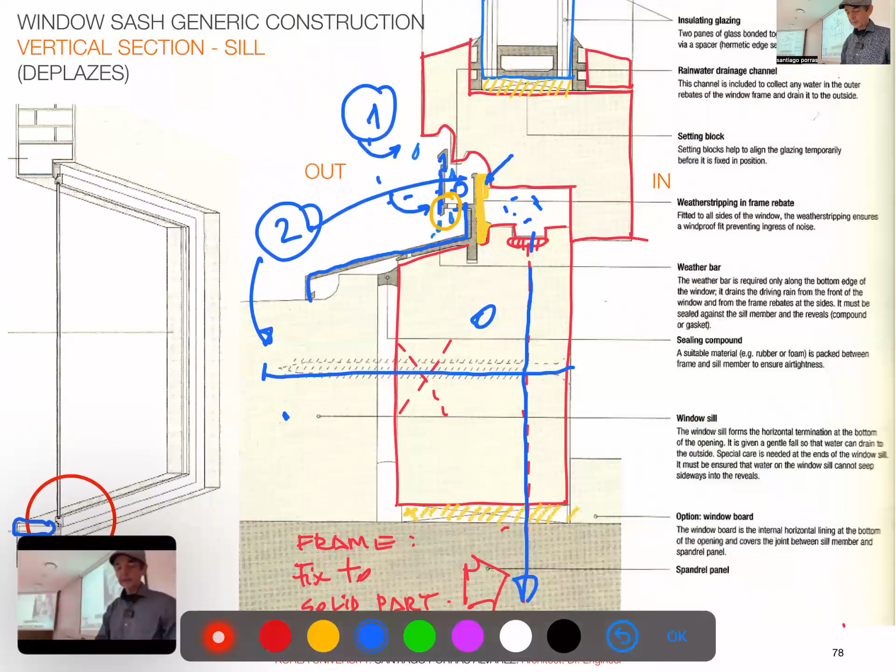Third, we have the gasket with the final decompression chamber, right? So we have like a double safety here because it's more critical. So it's kind of everything done twice. Let me go back, I will clean it. Okay, so one is the drip. One is another drip. 2 would be this small chamber which decompresses and has a weeping hole. The third is the gasket, and then fourth is the second chamber.

Many windows will have a small opening here, which will take the water out to the sill, right? You will see sometimes openings or small channels. They usually clog, they're not a good idea, but in this case, we do not expect the water to go so far. But sometimes you will see those openings, right?

And then finally, we have number 5, the overlapping element to close the joint between the frame and the sill. And as much as possible, this sill would be one piece element, right? Not 2 pieces. So the water will not affect it. Everything else is more or less the same.

Another thing which is interesting is this element under the glass. The glass needs also some kind of margin from the frame. Glass needs some kind of freedom of movement, so we always put some kind of support for the glass. We never put the glass straight exactly in the size of the frame. So this is as complicated as it can be, right? Most frames you will see are much more simple, but you have the basic things we need to see.

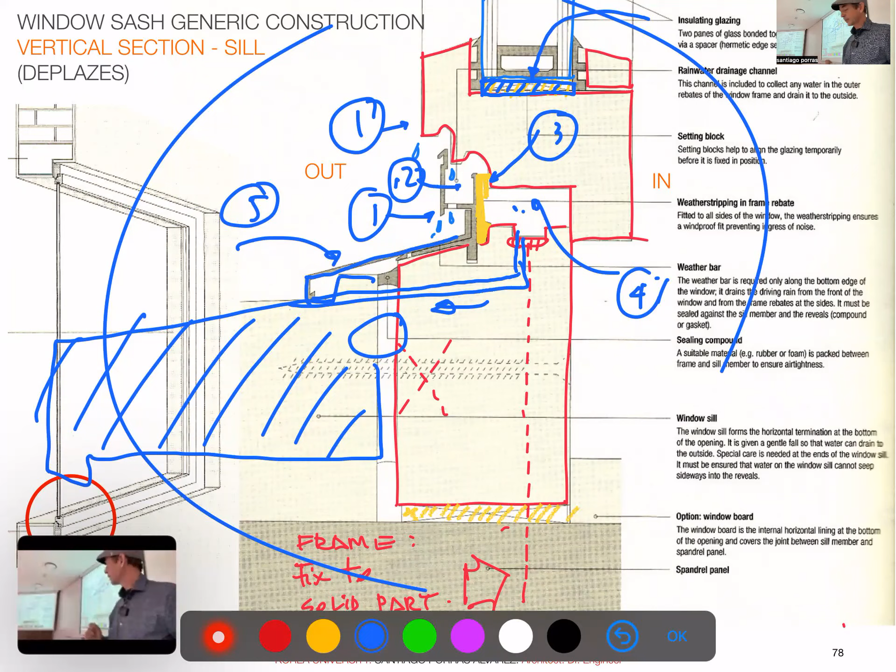So if we go, for example, now to a PVC window, outside and inside, we recognize, I will change to yellow, this Z element, right? With a dripper, the element to clip the glass, then the exterior part, which is an L, actually a Z because they have an additional fixing point, with only one decompression chamber. So here they just rely on a gasket. And you see the small channel here. So at points, they will have some kind of a weeping hole to get the water out. So this is simplified from the previous detail.

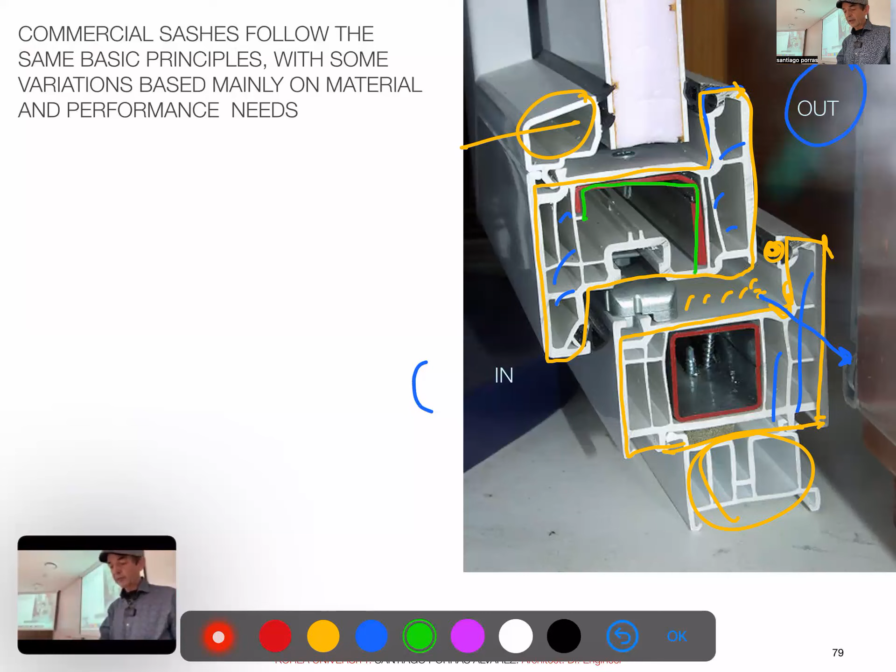And the complication inside is just because of the extrusion. The more layers you put, the more insulation you have, and the stronger the element is, and the lighter it is. And PVC, of course, needs some kind of a galvanized steel structure because PVC is very weak, so they need some kind of structure to support it. So if you understand that timber window we saw before, this is easy to see. You just identify those basic elements and then you analyze how this is done. And of course, I would add the drip. It's not fancy, but that will help a lot.

There's more examples. On the left, a bit more sophisticated PVC with the 2 chambers, right? Or a similar timber window with only 1 chamber, but with aluminum protection on the exterior. And you see now the standard is to have 3 layers of glass.

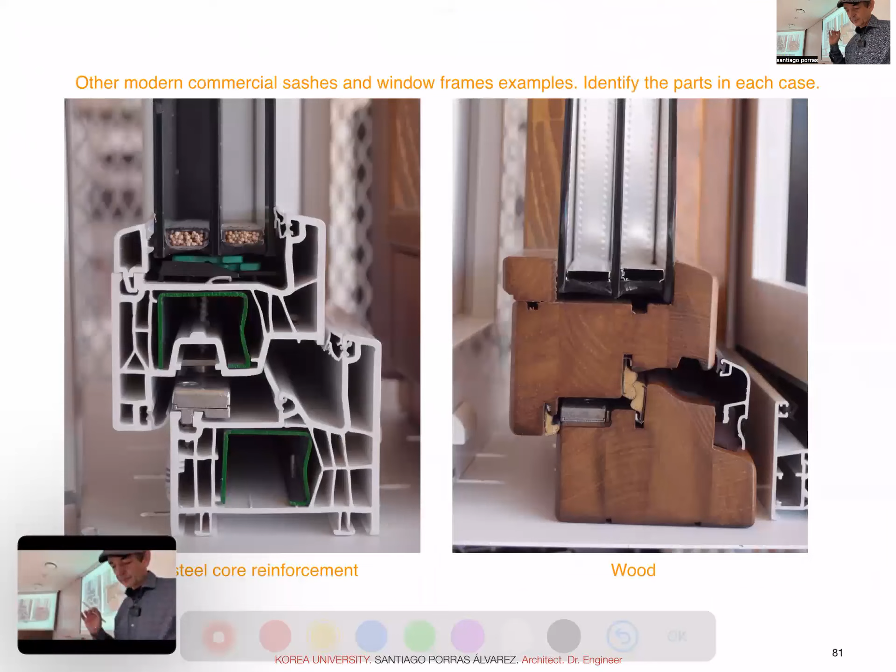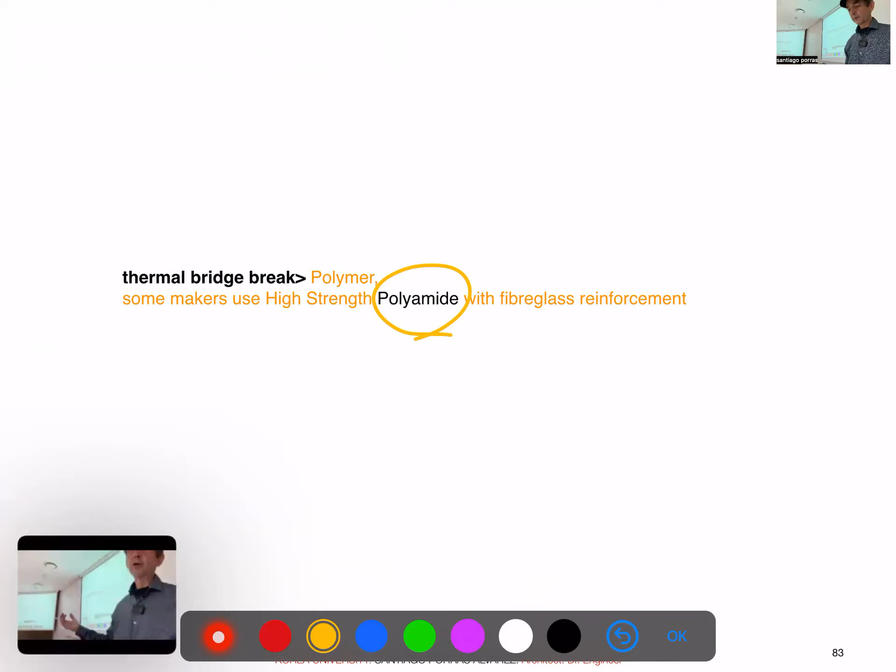I was telling you the plastic used is usually a polyamide. Not all makers say what they use, but it's this kind of engineering plastic. One more polymer to add to the repertoire. This is just for your information, it's interesting.

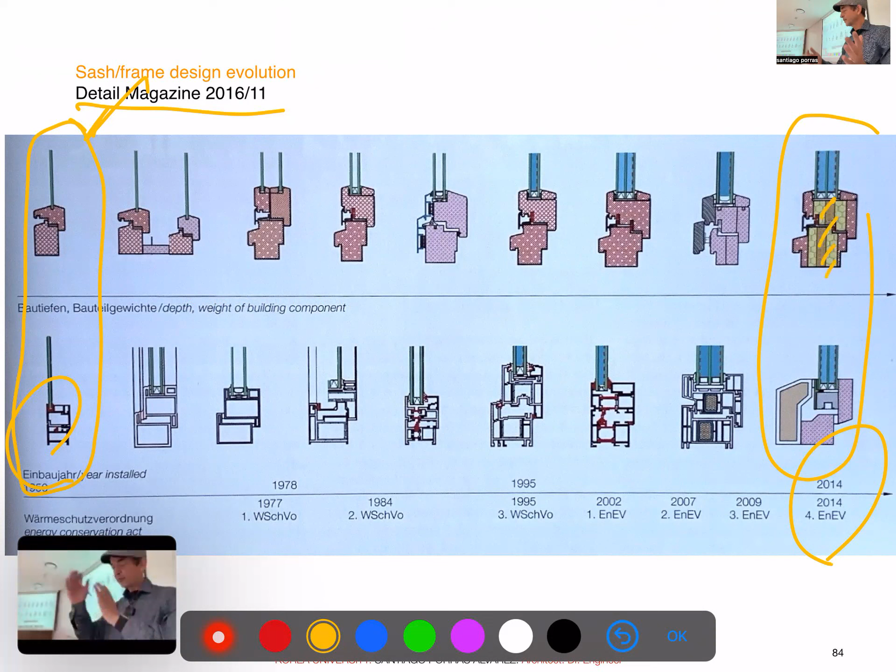But even with that complication, the basics with some detail exist there. Only we have more layering, more sophisticated insulation, or a mix of materials to have as much insulation as we can. So this is again...

a very much evolved timber example. What we saw probably is like this standard here. But if we want to go beyond the 1 or 0.6, we need really specific solutions. So as we said before, this kind of zero energy building is quite difficult to achieve.

And the same with aluminum. Sometimes you will need an additional insulation layer for it to work, to meet the standards of the passive house, which again is not easy. But you have the full collection here, which I think is interesting.

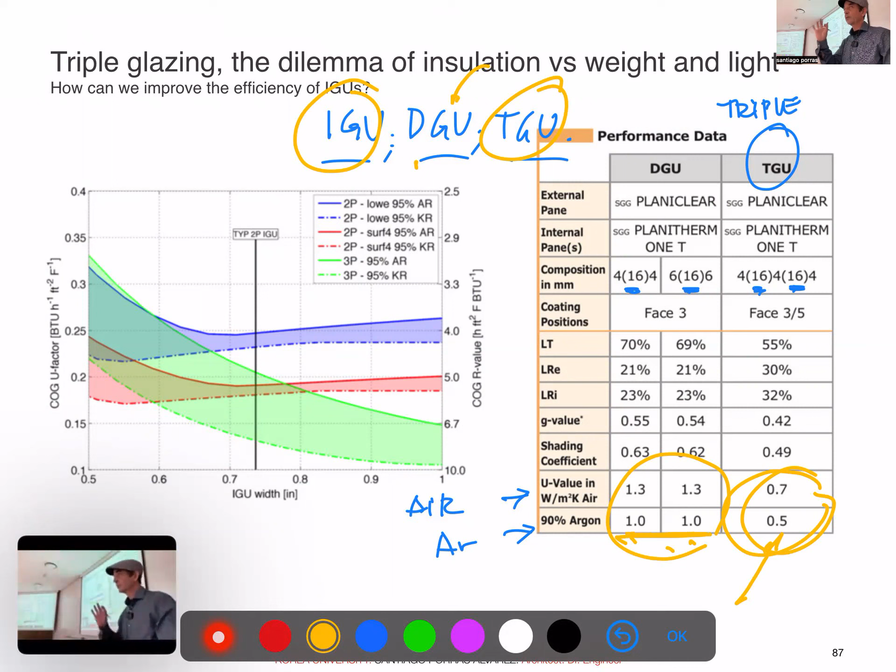And then another thing is the limitation of glass. IGU, you remember, DGU is double glass, triple glass. With triple glass, we may have the insulation we need. With double glass, we are at the limit on the required U-value. So we are really at the limit of materials in construction.

And as we said, thin glass might help make triple glass practical, because more glass means more embodied energy, more weight, and less light. So there are many inconveniences there, and probably thin glass will help.

I wanted to do this in class, but it's already time, so we cannot do it actually. But we saw the most important, the most difficult part. The rest is just examples from the book, which we can see later.

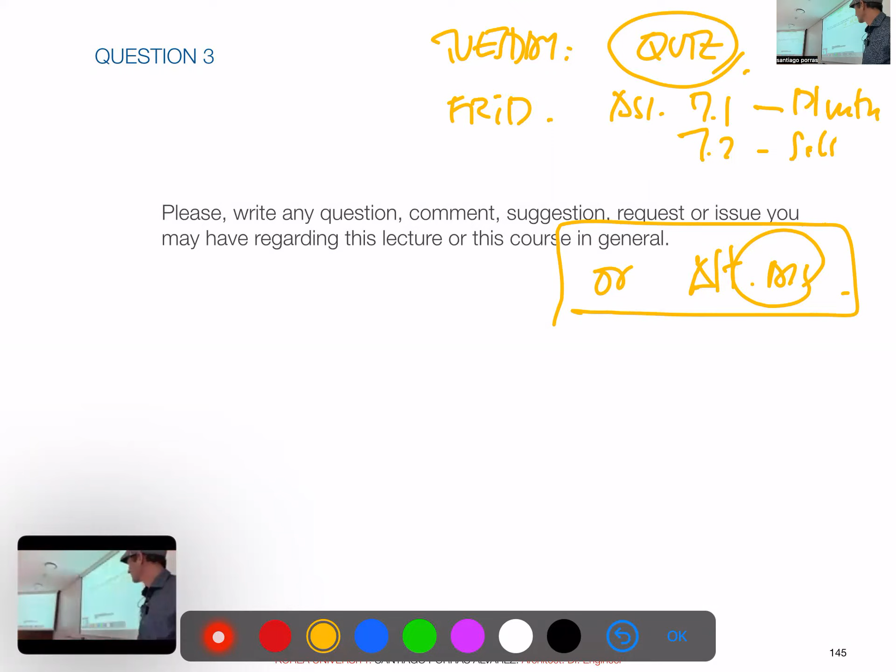Yes. How was the trip? Sorry, the trip you went on with the studio.